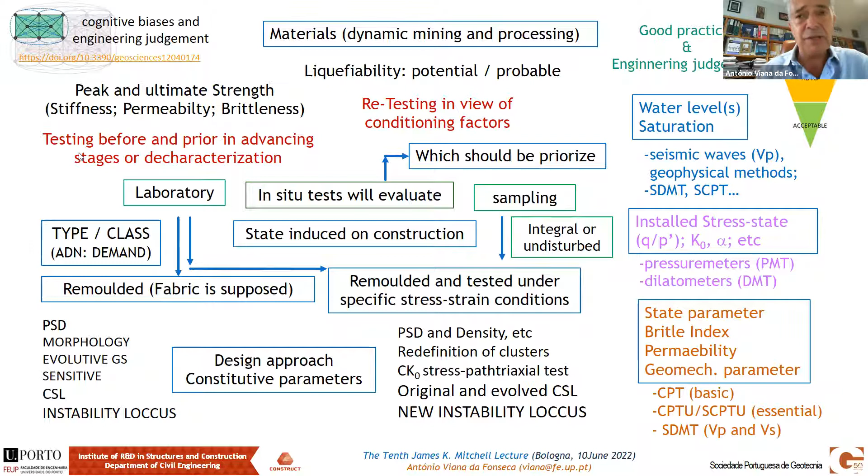This is like a schematic diagram of the complexity of these structures. The materials are dynamic—mining and processing—and they are necessarily variable during all the years these dams go up, in each phase, each height, with different quarries, or even within the same mine, variation exists. But that won't be the mainstream of the problem. The problem is all these materials after processing, and I will talk about iron mines. The core is iron, and we will discuss specifically one case where the percentage of iron is still very high—heavy silt and sand materials, always deposited during the years with spigoting from the crest into the upstream reservoir. This is a general overview that you can look at and criticize in due course. I will go on with our talk.

So why do we have these concerns? Because it is recurrent, unfortunately, that we have accidents in these complex structures due to several reasons, and I will immediately discuss them.

You can see here 1998 in Spain, Mount Polley, very, very recent, 2014. Then after 1 year, Fundão, the first big accident in Minas Gerais, a catastrophic disaster in terms of environmental impact.

We do remember that the satellites observed the incoming mud in the Atlantic Ocean after running for 200 kilometers or so. Then we had also a very well studied and detailed analysis in Cadia, New South Wales, Australia, 2018, very much analyzed and thoroughly analyzed by our colleague Mike Jefferies in his report, which is public.

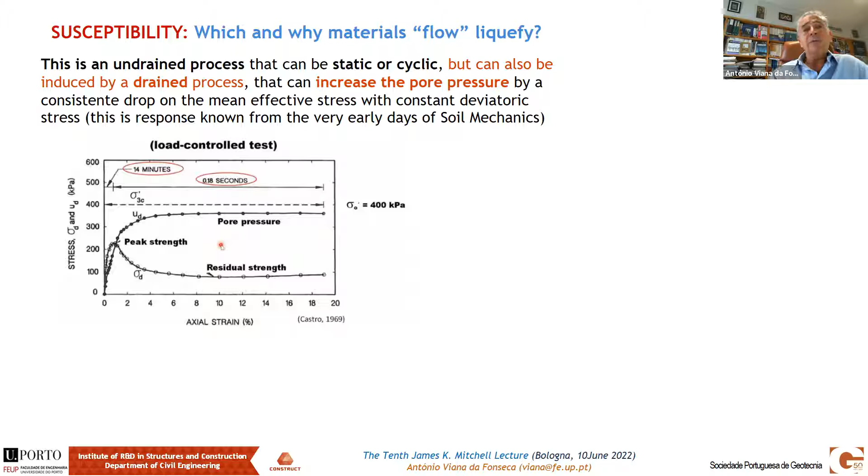It's a long way known subject, and you can see here some results from Castro working in the States with Terzaghi, Casagrande. And you can see here that these are the very, very classical results from his thesis.

But then I put here some schematic picture of how they stand, how they work when they are loaded by any stress path that I will discuss also. And by some reason, they get into a very peak, a very high strength and drop suddenly, even before getting into the frictional critical state approach.

I mean, the friction angle, which we know very well from the soil mechanics, the critical state soil mechanics approach. But this is strange. This can be considered to be strange, and it is unusual that these soils happen to go into a very stiff behavior and get a very fair and high peak strength, but then start immediately to soften deeply to a residual value.

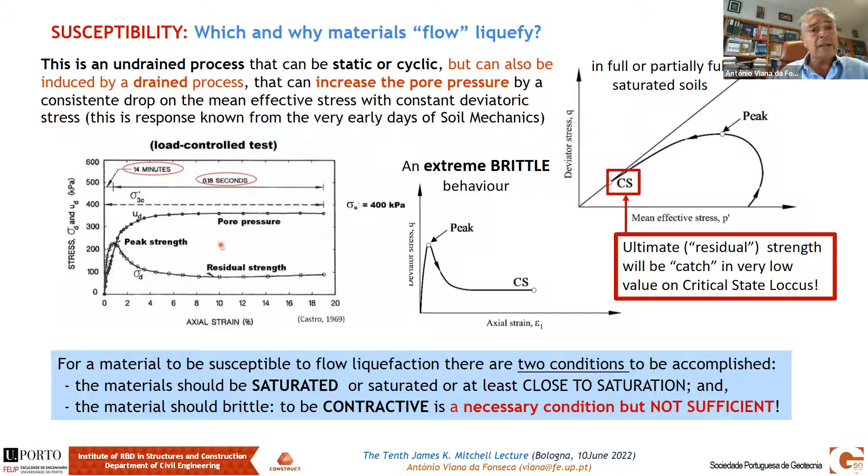So the key issue is that triaxial undrained compression tests can contribute to evaluate these strengths, these issues, the stiffness associated to a brittle condition.

So the materials seem to go with very low increase of pore pressure in the first phase of the loading, which is fast enough to be undrained, and then drop down. So maybe stiffness, high stiffness in relation to the strengths will be an issue, and it is an issue.

So we need now to state very clearly that we do not have in the common modeling approaches an easy treatment of this process, because this is not a conventional phase transformation locus, because there is no hardening after the incoming of the pore pressure increase.

And so we don't have the classical plasticity theories available here. So we have to have new flow rules. And there are some models already with this that I can discuss later on.

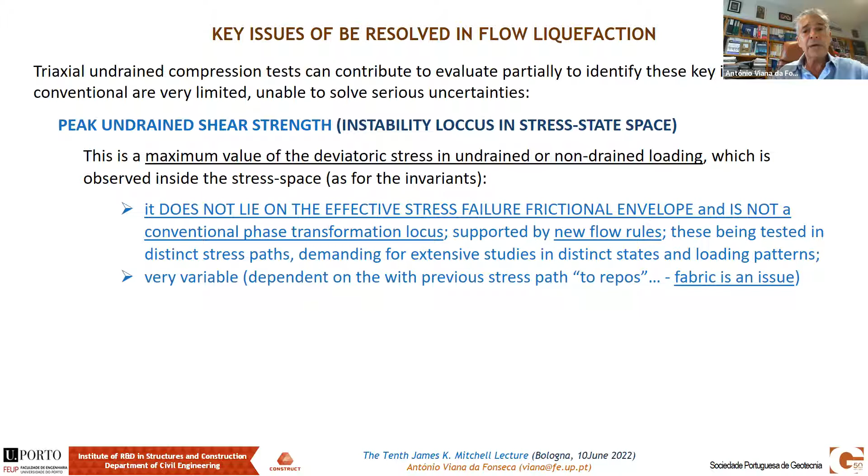This is very variable. It depends a lot on the interlocking between particles that happen to have high stiffness or high relative stiffness due to the strength. Fabric is an issue, so the fabric that is settled during the process of deposition of these materials is important. When we do these tests in the lab or interpret in situ tests, we have to keep that in mind.

So residual shear strength is quite complex if we don't have very thorough tests. Even in triaxial tests, or hollow cylinder tests, which are more complicated, or direct simple shear tests, I will not discuss this in detail, it's too much to cover, but I will focus on some aspects. We also need to study how to do this more easily, at least commonly, through in situ tests and new approaches.

I have already discussed the fundamental characteristics of residual or post-peak shear strength, which relate to the critical state line, and what is necessary to create this condition and induce failure of these huge structures. The susceptibility is there, but we have to have hazard, and the hazard, the triggering factors, are what matter.

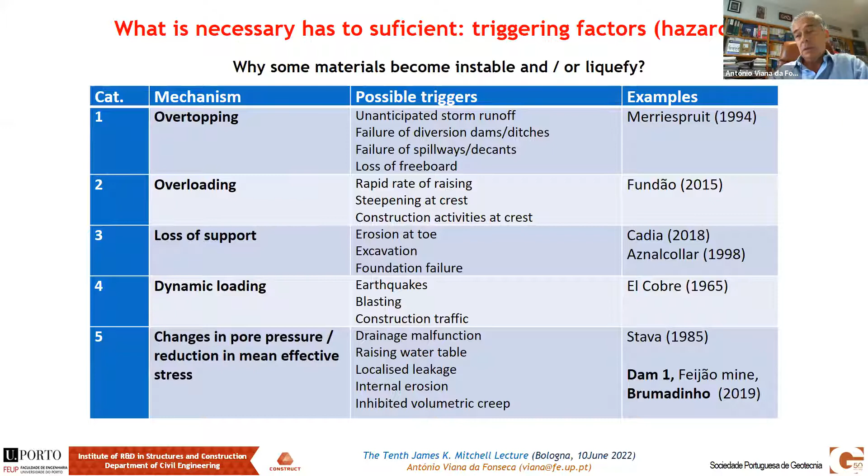El Cobre is a dynamic case, earthquake-induced pore pressure increase and then collapse. And finally, Stava seems to be a similar condition, in terms of the dam, to what we realized in the last panel of Brumadinho.

We will see. Here you can see some drawings and schemes of the typical stress paths that you could expect in such a triggering process. I will not detail that, but you can see here that drained unloading can also be a problem.

I mean, you are relieving the lateral stress or confinement stress, and things tend to come slowly into a specific point, which is the instability locus somewhere in the stress state space. Then at that moment, it starts to fall down rapidly, so in an undrained condition, towards residual.

And that's a fact, we can do that in the lab and try to reproduce it in these structures. The undrained shearing is the classical case: you put overload very rapidly during deposition of these tailings, and for some reason there is no draining system competent enough to alleviate this natural increase of pore pressure, which accumulates, could be going towards the critical state line, but then reaches a condition that drops again down to very low residual values.

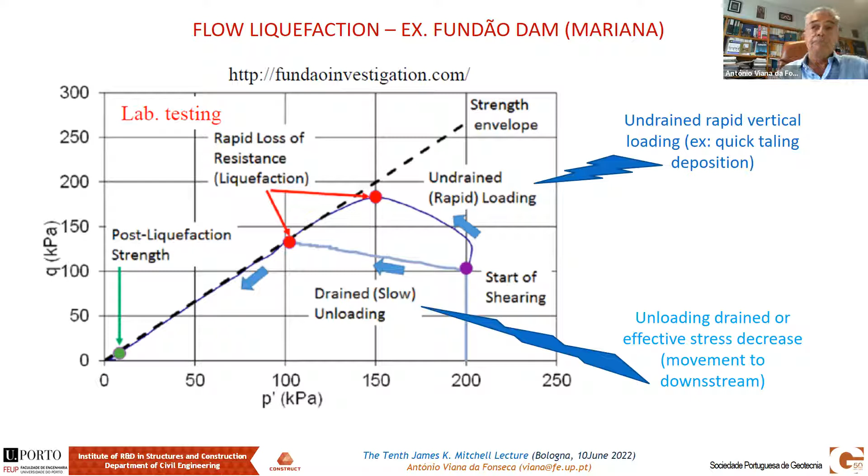Anyway, so Dam 1 in Brumadinho. Brumadinho is the village that was mostly affected by this collapse. The mine is called Córrego do Feijão, meaning the small river of bean. That's the name, very simple, so it's the small river, little river of the bean, Feijão.

Because there are several rivers in these valleys, water is always very high in the reservoir. And the draining systems have to be very thoroughly implemented.

Well, this is a scheme of the dam, and I will show you in a moment how fast this happened, as a lot of people know and others may not. So on 25 January 2019, in 20 seconds...

The dam collapsed. I could show you a movie, you can go to the internet, there are a lot of illustrations of that, because there were cameras filming at the moment, observation, instrumentation, and it is terrible.

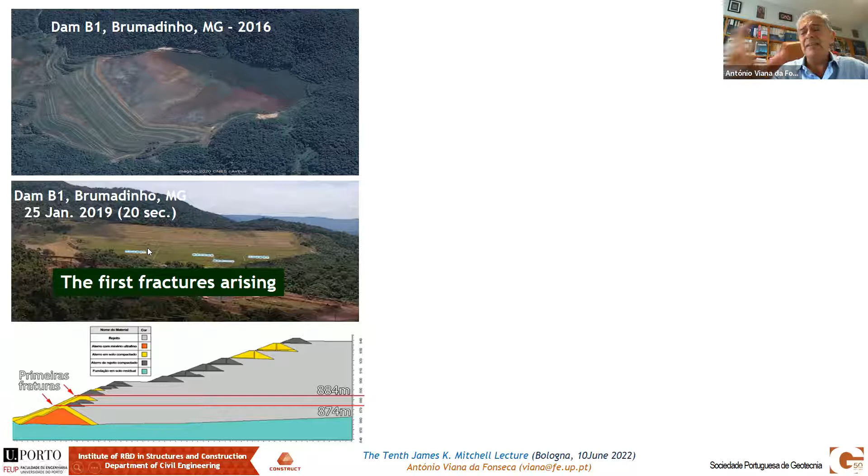But look, the fractures started somewhere here when they are analyzed in detail. And then you can see that at 12, 18, 23 seconds, something was already moving here, and cracks are starting here.

Well, 10 seconds after, and there are lots of images during the process, the dam was out. The wall is here still standing, but the rest, this is clearly the sign of the surface, quite vertical, and eventually planar.

And you can see the huge amount of mud going, unfortunately, to the headquarters and part of the infrastructures of Vale, and also running to the population and the village. So it's terrible. It's seconds.

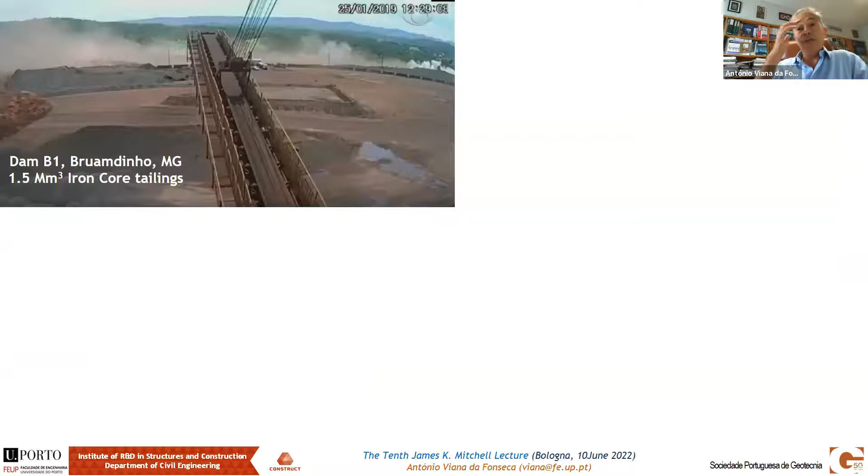And there is no real sign that was thoroughly analyzed, whether from the piezometers or even the observations, the radar — there are papers on these satellite measurements, etc. I mean, it's really too fast, even for common or even some upgraded recent instrumentation to detect.

So we have to be very careful when designing and analyzing these conditions.

So you can see here in the top of the reservoir. This is the crest somewhere here. You can see the valley there, and this is the top of the reservoir, which is something like 1.5 million cubic meters of iron ore tailings, very heavy.

You can have unit volume like 30 something kilonewtons per cubic meter, and specific gravity around 5 something.

Anyway, so you can see the damage, you can see the disaster, the catastrophe, and in the end, the post-mortem analysis area.

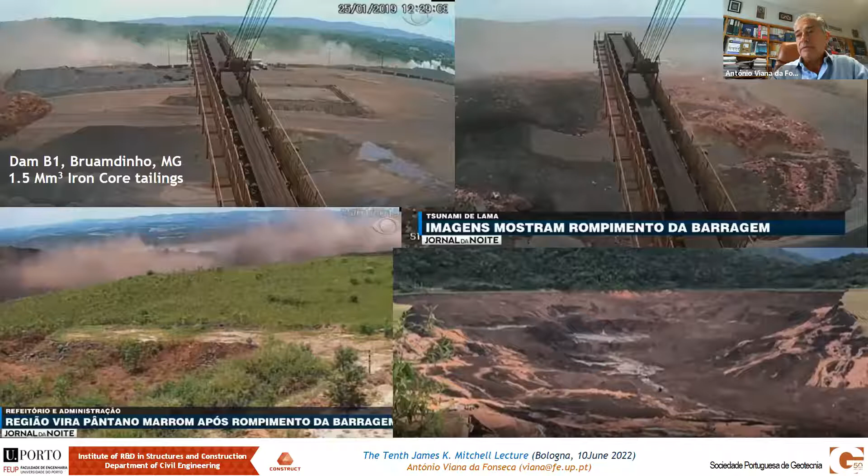So we have susceptibility, we do. We have hazard, we may have. We can see that we have to go after this, and we did.

We had panels that worked on this analysis, very, very competent panels, most notably and in more detail two, one led by Professor Peter Robertson, whom I consider a good friend, and they did a very good work with the elements they had at the time.

In the end, with a very thorough analysis of the in situ data and the lab tests they could have, and all the lab tests they could do with sampling that was limited by the conditions, they reached some conclusions that could be valid.

But afterwards we were challenged to do a reassessment of these conditions with more data, and mainly, as I will tell you, with a lot more lab tests, with samples collected really inside the mass that had collapsed. I will explain in a moment.

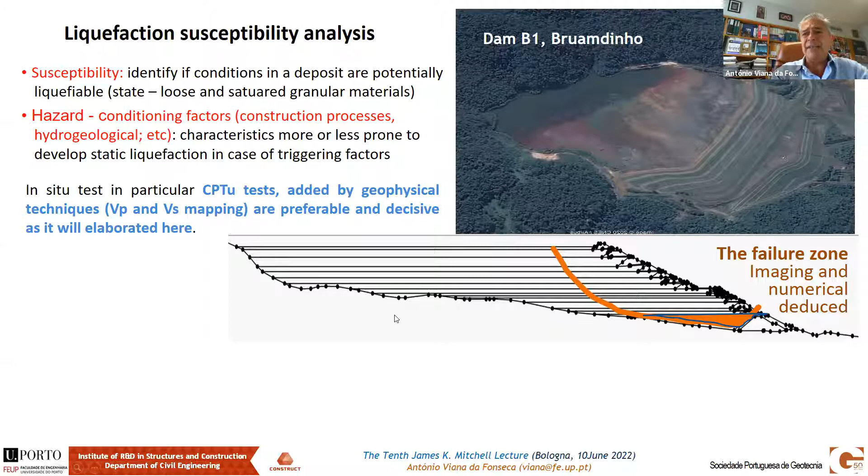And then after all the numerical analysis that were developed in Barcelona, at UPC, the Polytechnical University of Catalonia, with colleagues Antonio Gens and Marcos Arroyo, whom I have to acknowledge for working together with me on this analysis. And in Porto, we did a lot of characterization that I will show you in a moment.

The thing is, this is obviously already a back analysis of the old data that could be recovered from the previous in situ tests and some sampling, not undisturbed, but which could help in defining all these sections.

This is one of the sections, the one we realized afterwards was intercepting the point or area where the increase in pore pressure was generated. And you can see here the shape, which fits well with the imaging-deduced and numerical analysis.

But then I had one point to discuss and show you. There was a lot of concern about this and other dams before the failure, mostly because after the Fundão failure, there was very strict regulation about the conditions of these dams. And Vale and its consultants were looking into the stability conditions of B1.

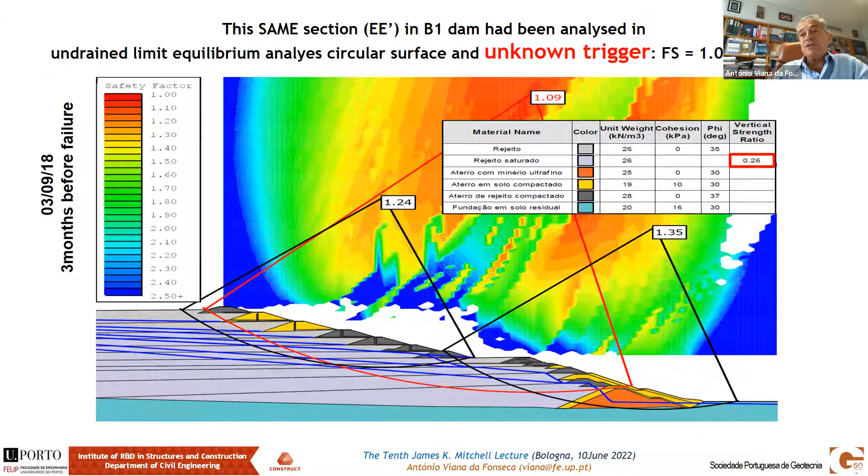You can see here some of the results of the latest analysis, developed between common limit equilibrium analysis with classical circular failure surfaces, and getting the data from the tests that were available. With no more comments than the imaging and the values expressed in these public reports, we could have a factor of safety of 1.09 in the red surface using the Spencer method.

I put here the numerical analysis that were done, a lot of numerical analysis during this month of analysis in CMINI plus FLAC. It's not really very far from circular, in fact it's wider here, mostly planar, not circular, but anyway the problem was there. Eventually a limit equilibrium analysis, if taken with other inputs, could be and should be a very good sign that the dam was at the limit, even in a deterministic approach.

I want to share, because it's important for the discussion, that the laboratory tests and in situ tests interpreted until that moment were a little tricky, because there were vane tests in these materials, typically silty sand materials, which are not reliable since you can have partial draining conditions. The values you can see here, which I will not detail, are typically much higher than the ones from the reinterpretation of the CPT and CPT-U tests made prior to the failure.

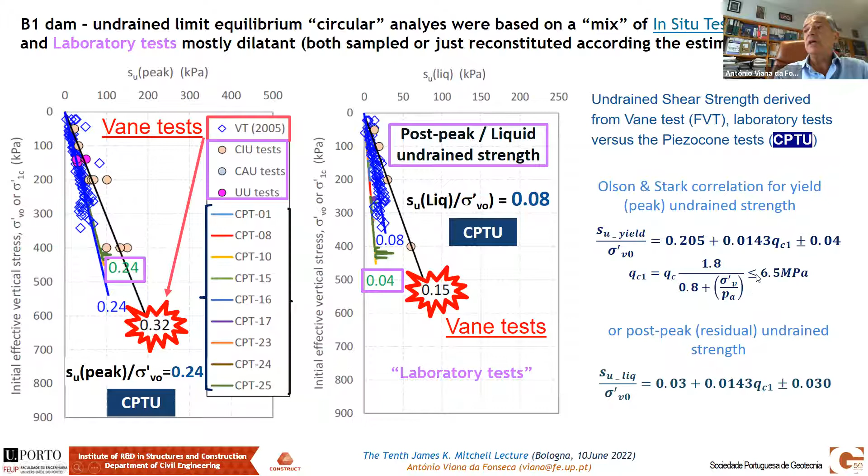Just here, Olson and Stark correlation, you can see how different the values come to be in a specific analysis of the CPT-U tests.

Critical state soil mechanics is a fundamental approach to get the peak and post-peak residual or liquefied resistance values. There is some confusion in concepts, like post-peak sensitivity in clays is not the same, because these are full liquefaction in non-plastic granular soils, which can be due to cyclic actions, while in monotonic process stress paths you may have different backgrounds on these behaviors. In this case there is a steady rise of the pore pressure ratio, and complete loss of contact between particles can happen when dealing with earthquakes, with vibrations.

In that condition full liquefaction can happen because the particles will not stand together, while in a monotonic process, in a flow process, the particles are provisionally, temporarily in a mud condition, but then tend to grab together again at a very low level on the critical state line, still getting into frictional behavior, but then effective stress is very low.

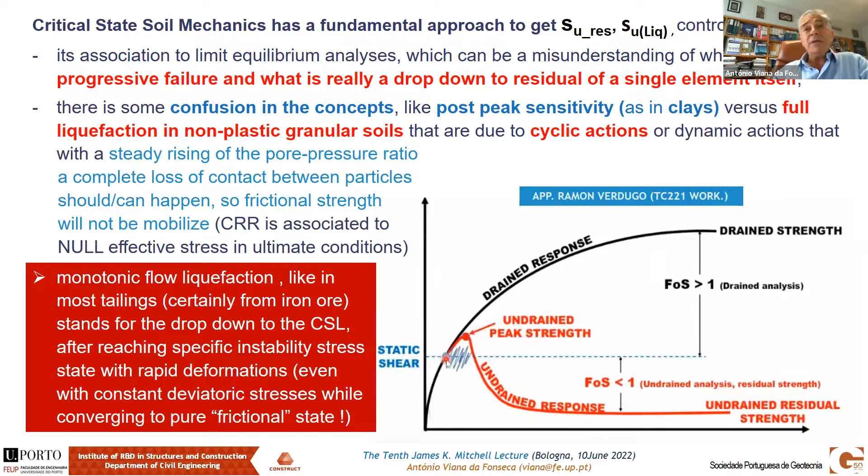With this in mind, described here in this red box, we have to do specific analysis. Fortunately, in effective stress state, meaning finite element codes, finite difference codes like FLAC etc., these have to be done ideally in effective stress state, fully coupled analysis, if the models we integrate are competent to do that. There are models already very much competent, not completely - I will discuss anisotropy at the end of this presentation - but this is available, and we should, and are going more and more in this direction, fortunately.

We can also rely on limit equilibrium analysis if we have a good interpretation of the limit values, in the end the very low limit values to be considered. This is described here - this has been done already in Fundão using NorSand from Been and Jefferies, the model. Even in Fundão, Professor Morgenstern and colleagues did the same in FLAC, both in FLAC.

Professor Peter Robertson in the B1 did the same with NorSand. Unfortunately, NorSand could not be taken towards the end, so they had to use a simpler model, which was a pity. And finally, in recent days, Cadia also, Jefferies in 2019, after the failure in 2018, applied NorSand with no problem.

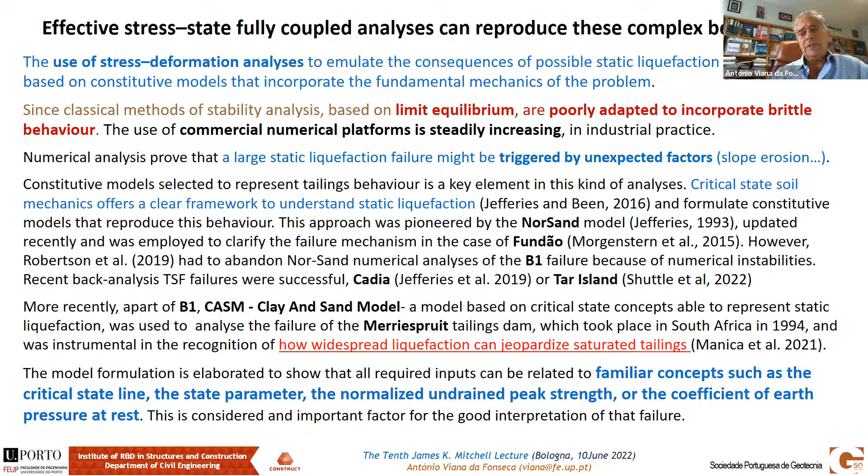They did the reinterpretation of this B1 by using the CASM, critical state model for sands and clays, soil mechanics. I will not describe the model, but anyway, it is already emulating very well the process, although with a few limitations that we will discuss.

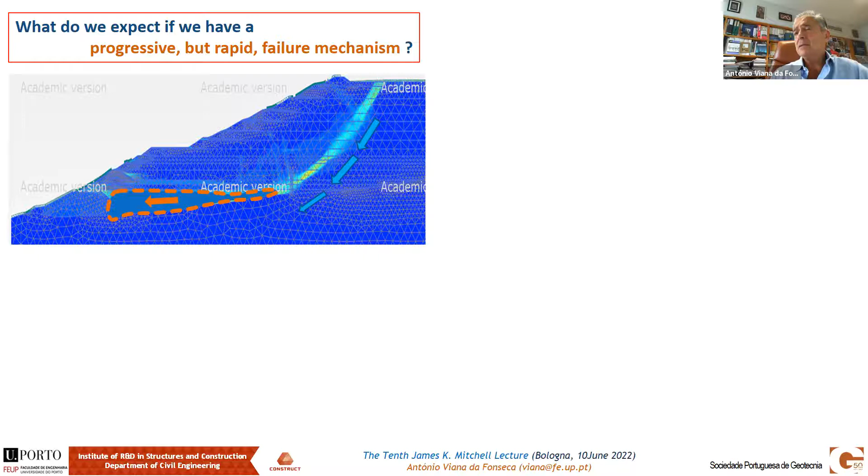So what do we expect if we have a progressive failure? Rapid failure? Well, we do need to look for the tests that we could do in representative samples in the lab. I just put here in advance some of the tests that we did.

Look at this. This is another material, not the material in Brumadinho, but similar, very similar. You can see here, just to start, that if we do a K0, an anisotropically consolidated test in undrained conditions, if you go in compression, I will show in a minute. But if you go in extension, we have very, very low values mobilized of undrained shear strength.

I will come back to this because it is important to realize that in these kinds of failures, as in slopes or whatever you can imagine, or even foundations, you may have the need to look for anisotropy, the induced and the inherent - of course if there is inherent anisotropy - and induced anisotropy if you have extension tests like lateral compression conditions. And this is very, very critical.

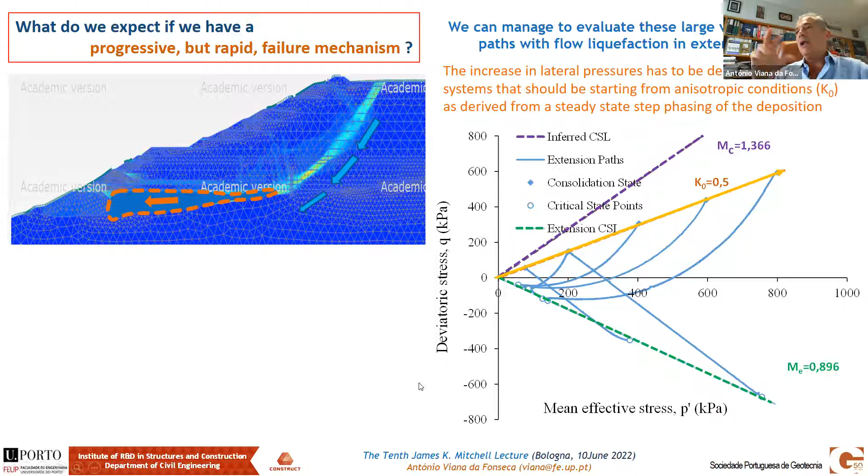You can see that the drained tests were confirming mostly the same friction angle, no inherent anisotropy, but then you have the induced anisotropy, which is very, very high. So it's like an alert, an alarm. It means we have to be aware that the stress paths are not exclusively in compression.

So if you go into numerical analysis, you can cope with this, but only if the model is able to reproduce these conditions - we will see in a moment. And we are looking for the implementation of these anisotropic models in order to reproduce these conditions.

Do we need undisturbed samples? We should, but at that time there were no undisturbed samples in the huge amount of data available in the lab, as I told you before. There was no gel push sampler, which is in fact a very excellent sampling technique developed by Kiso-Jiban company in Japan, which we happened to work with in a very recent European project, Liquefact, together with Trevi, with the intersection of Professor Michele Jamiolkowski, and in collaboration with Technoin, Trevi, and finally associated with the University of Napoli, Federico II. So we have some experience.

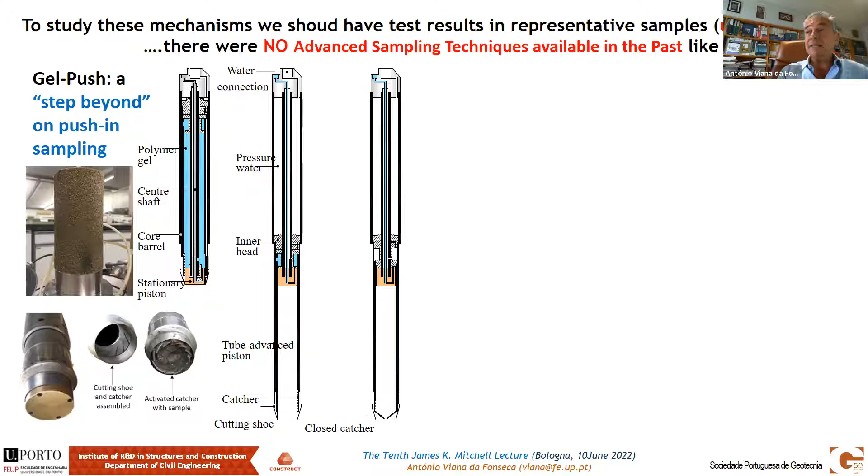It's really a very nice equipment, and we did very, very good sampling in sands and silty sands, alluvial, close to Lisbon, as the Italians did in the north of Italy, because they were studying the consequences of the liquefaction of Emilia-Romagna in 2012.

But we have alternatives, and Vale, for instance, is now working a lot on implementing these systems as a possibility to have good samples to get into the lab, to preserve at least most of the fabric inherent to these materials, and to do more representative tests when they want to look at the behavior in triaxials or whatever. Dames and Moore is a very good alternative, as we also realized from the studies we did in the Liquefact project, the European project financed by the Commission.

Anyway, but if you don't have that, what can we do? We know that most of us working in this area can, at least for the critical states - but more than that, if we try to reproduce the in situ conditions of a very loose deposition, we can start with the materials in a very loose condition by using the technique of moist tamping. I will not describe it; it is well described in different papers, and I just name one here, and you can see the illustration of the process.

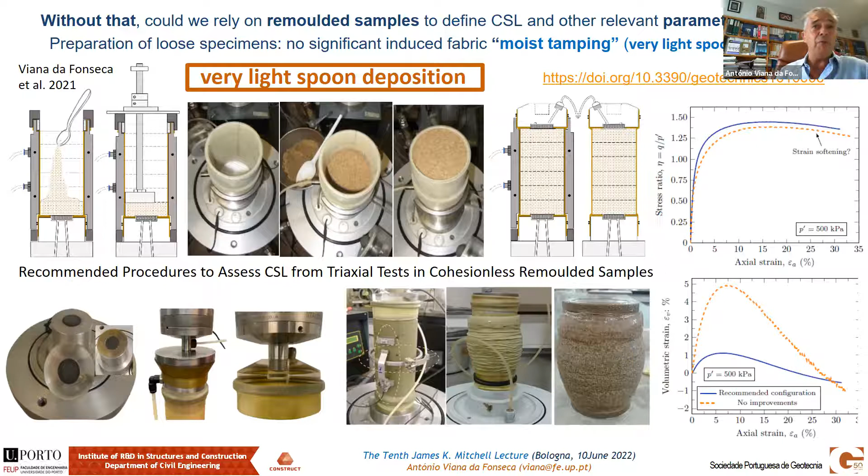We were very confident with the results. Not perfect—we have no undisturbed samples, but we have some.

This is just some of the results that I will show in a moment, and mostly the point I want to introduce here. We had some small block samples that we compared, and you can see comparisons between critical states in undisturbed and remolded conditions, and they fit together.

Even in this very sensitive representation with void ratio against mean effective stress for the critical state, the lines you see there—black, brown, and red—are the ones obtained by the remolded conditions. The other points are undisturbed samples, which are always very anisotropic.

Still, the main matrix, when standing in the more blackish areas that I'll show you, or brownish or red, represents different percentages of iron due to the timing of the process in the mine, and also due to the injection process. Fines far away, less fines, coarser, blackish because they have more iron.

This is detailed in the report, and it will be in papers soon. We are quite confident that we could work with these critical state lines.

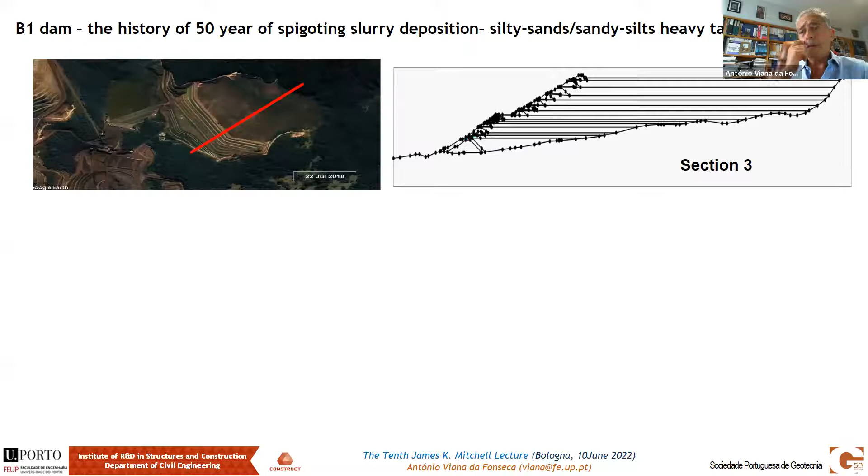This is described a little bit in a paper we published some months ago. So the dam is here. The dam failed like that. No details needed.

The system response considerations of B1 were very much detailed, with a lot of work on the in situ data. This system response was based mostly on tests done before.

We also looked at 3 experimental sites where we grabbed these new materials, new in terms of characterization, well allocated inside the reservoir. We managed to get them, by a topographic approach, somewhere inside the failure area, around the failure area, and in the bottom of the failure line, I would say band.

Wow, how can you do that? And then we got some material here too, which we wanted to test because it's clearly finer with some slimes around. How can you do that? It had already failed. Indeed it was.

You can see here from the CPTU, the in situ tests—there were some good CPTU tests, mostly one year before and two years before, they were worried about that. We managed to look at where we could get this material, where we could get that material.

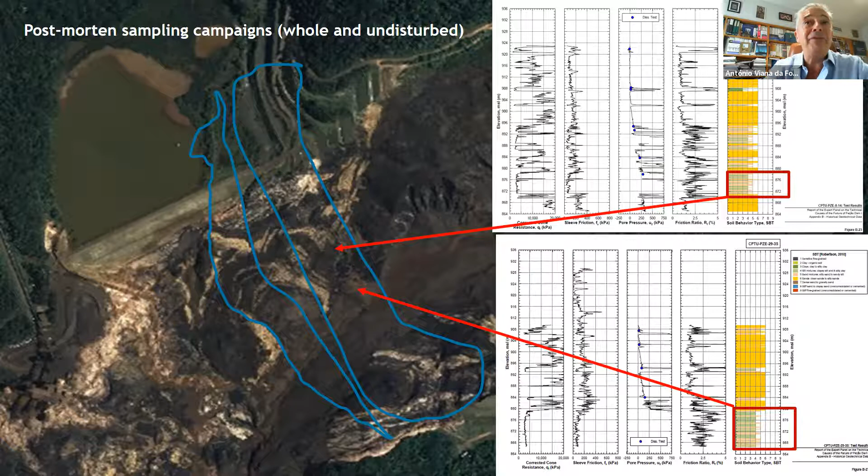We were there before Christmas 2019, and we decided to—what, get into the mud? No, we had the luck to realize, which I didn't know before because I had the images, that there was huge... I mean, I'm always saying this because everything is very big.

Blocks, massive blocks that after the collapse and the running of the flow, some of the masses, integer, preserved masses, stood in the borders. You can see here the draw of the dam. The dam is still here, more or less like that in the crest, and this is the lower part. So we looked at blocks that over time, during 1 year, slid down, but the mass was preserved. This was very interesting for us.

So we had to go there to get the materials, digging small ditches enough to go into the interior, undisturbed materials, and to recoil some block samples. We didn't have too much time, but we also collected remolded materials from the interior. We carved out big bags of materials that were transported to Porto, where we did the lab tests.

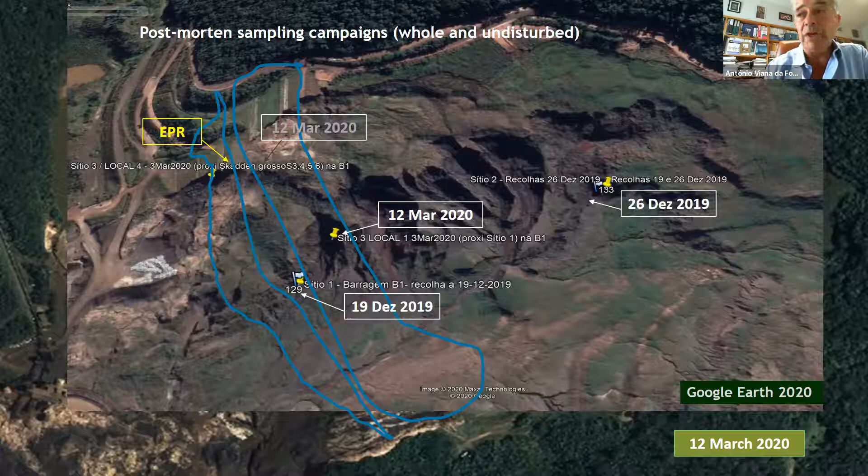This allowed us to do more in-depth analysis of the materials, which unfortunately was not done in the first panel from the group of experts led by Professor Peter Robertson. They could not get these materials when they went there because the site was still very unstable, full of instability, and still very wet, at a moment it was really impossible to go down. We had the luck to go.

You can see here some images that are in that paper in the Soils and Rocks journal, showing the works we did there. There were 3 sites: site 1, site 2, and site 3. Site 2 is somewhere here, look at the mouse, long away, because it's a zone where we have more fines and slimes. These were the basis of our studies.

You can see the blocks that were recoiled, illustrated here, and we are working sampling the undisturbed conditions. This was really a tough process. But the big bags were the ones that assembled the materials as a whole. And we did identify very distinct materials.

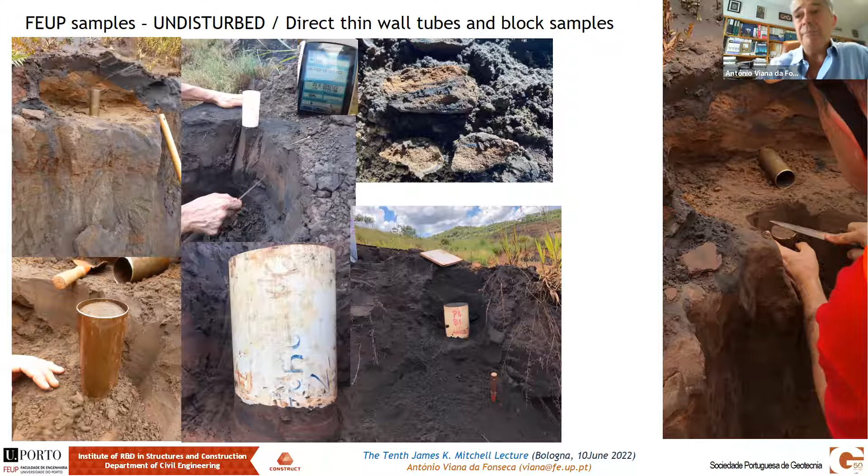The blackish, large zones of these blocks were really blackish with a very high percentage of iron, like 80% or a little less, a huge amount of iron, from times when the process was not so efficient. There were also more brownish, more processed, finer and lighter materials. And when you get into the very fine materials, you get the reddish ones, very much oxidized, older ones, on the bottom of the dam. So we recognized 3 kinds of clusters of materials.

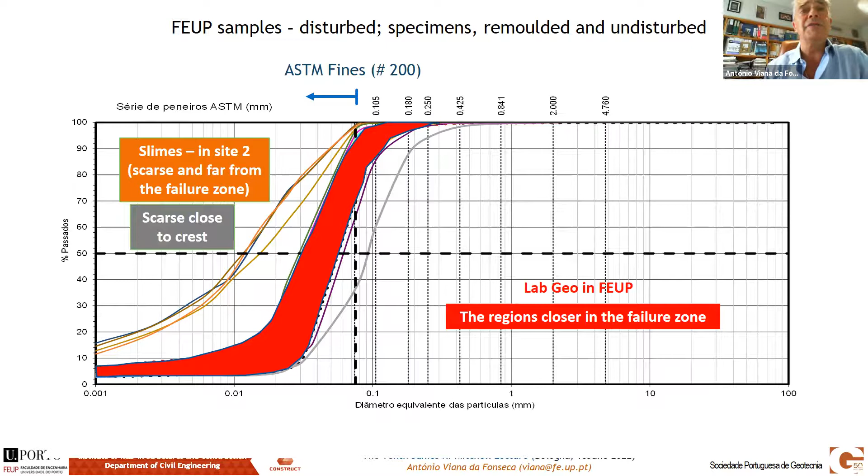We have them here inside the whole set of samples available at that time from previous analysis. This is the region closer to the failure zone after analysis of this old data. When we got to these sites, we defined all the materials we had — this is only the average of each kind of cluster, black, red, and brownish — from every bag, every sample, every undisturbed sample was analyzed for particle size distribution and Atterberg limits.

There was no plasticity in any of them, only in the slimes. You can see here the difference in GS, specific gravity of the grains — like 5, like 4.5, and like 3.85, completely different. The grain size distribution seems very close; indeed it is, although in the sands and silts there are some differences between the very fine and less fine materials, but mostly the difference comes from the GS. We also did microscopy analysis, SEM etc., and they are really very different.

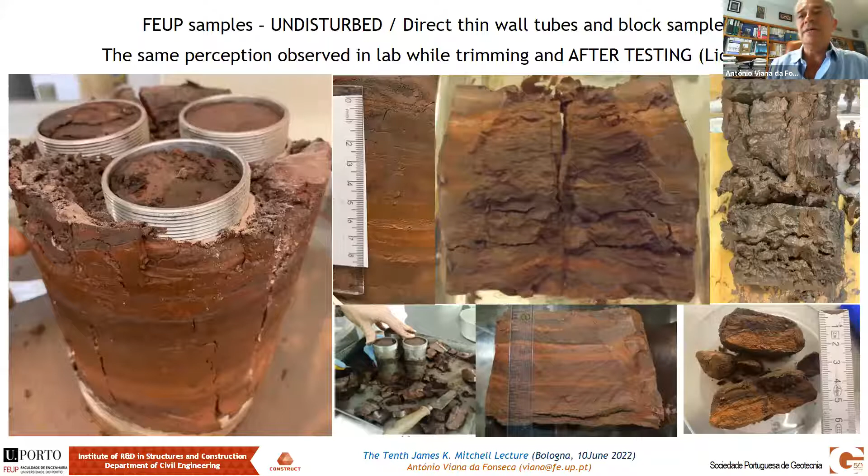So, 3 clusters for our analysis, for the numerical approaches. You can see here some of these undisturbed samples. The result of that, which is really very nice, is already being assembled into the triaxial cells where it's possible, mostly with Bender elements, to evaluate the VS value, which is very important to define the stiffness of these materials.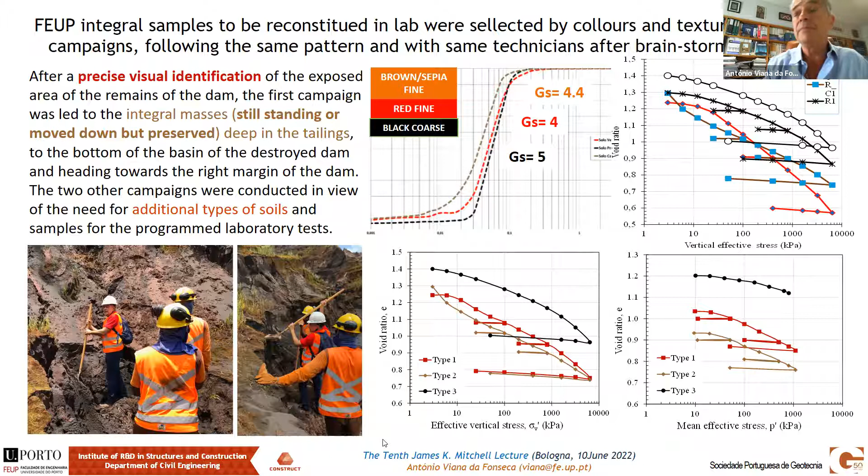And well, between the red and the brown, there is a small difference, which was revealed in compressibility, in oedometer tests, and isotropic consolidations, but also in the critical state lines, which is not the only issue we should be concerned about. We are going towards the main concern, which is the undrained behavior, in a moment.

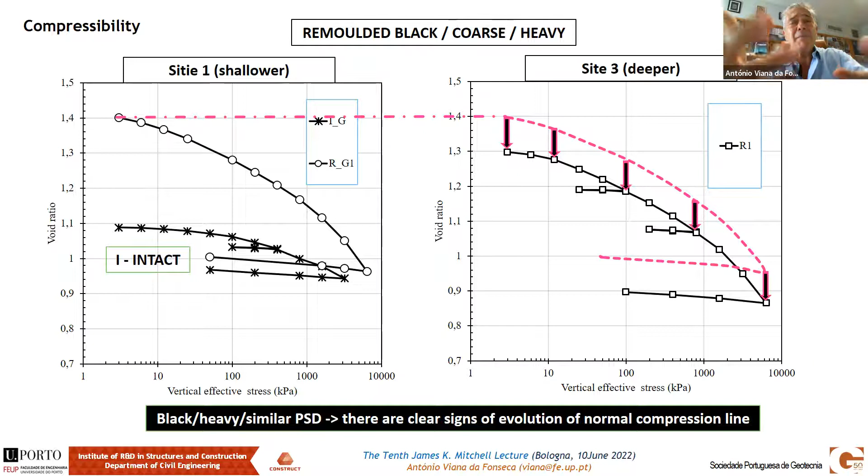So we have that. And just for you to have an idea, if you go from a shallower to a deeper site in the same material, because the deposition was non-linear from the margins to the center, the deeper material in the blocks is a little bit denser when compared with the same kind of material upper, which means that it has evolved.

Well, of course, it had a lot of pressure on it, and it will have consequences even in the particle morphology, which will have consequences in the critical state lines.

Then we have all these deformability moduli in virgin or unload-reload, which is necessary for the model. Just for curiosity, the critical state lines are detailed in the report and also in that paper.

You can see here that we always have a first phase of virgin tests with virgin materials reconstituted there, and we get some trend in the critical state line. Afterwards, after doing all the analysis always with virgin soil, we had material already with higher stress. We put them apart, even the dilatant conditions, we put them apart after testing, and then we started doing the analysis again with these materials, and we realized that the critical state line dropped down.

Something was happening at the particle level that could explain that, and that's in fact what we did - we are still waiting for new analysis. The SEM allowed us to see that the particles that were rougher at the start of the test tend to evolve to smoother, losing their roughness. That was a key factor for what happened after stress - the material could have a drop down of the critical state line.

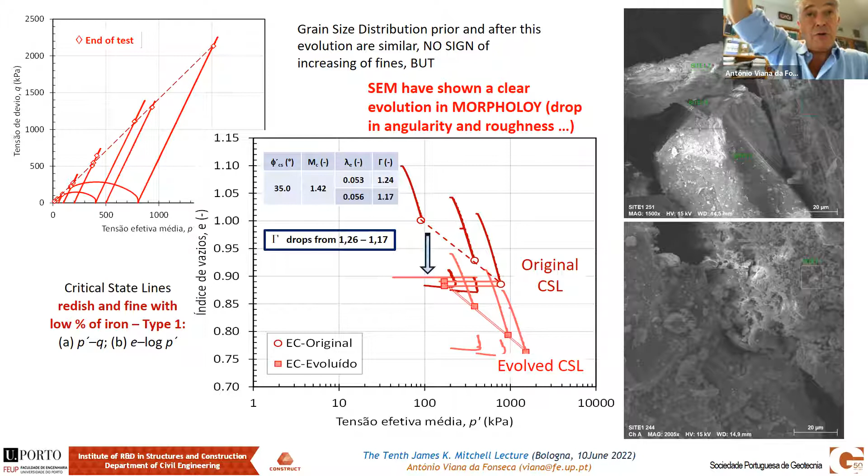So this is also an alert - you should be aware of that when doing analysis on the same materials coming from the shallower zones to the deeper zones. And this was incredibly reproduced in all 3 clusters of materials: the red, the brown, and the black material. All of them showed this evolved condition after being stressed up to higher confinement effective stress.

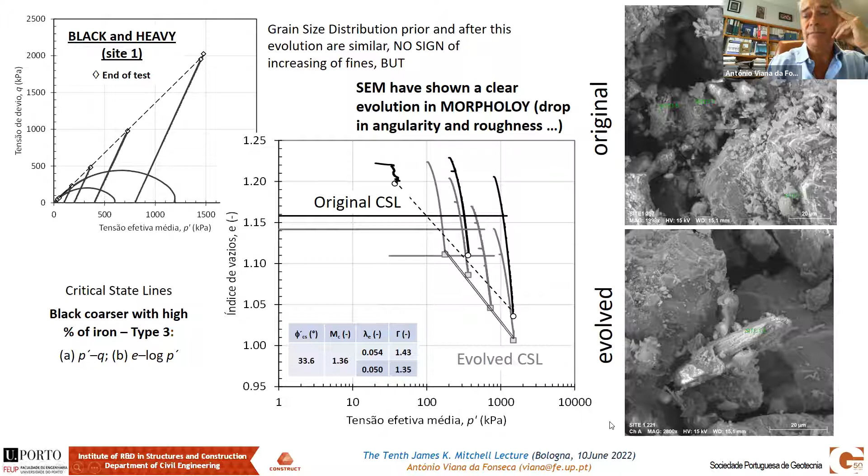So these are lab tests - results that were very important to define the critical state and dilatancy parameters that were then explored in numerical analysis. Just a small remark on the morphology, I will not spend too much time.

This is also available in the PowerPoint and here, and you can see it in the written part. But this is just a quick recap of the analysis we can do in morphology to look for the quantitative indexes that can help us define the quality of the material and expect different compressibility and critical state lines, which in fact is associated with compressibility, as we know.

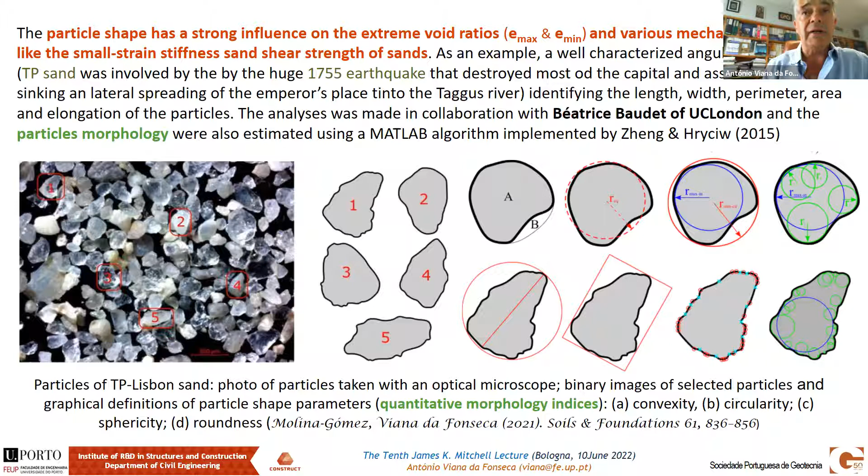Convexity, circularity, sphericity, roundness, and roughness is a subject that is now well dealt with. We have to be aware of that. We have been doing this in sands, and other people have been doing this comparing different materials, in terms of these different indexes.

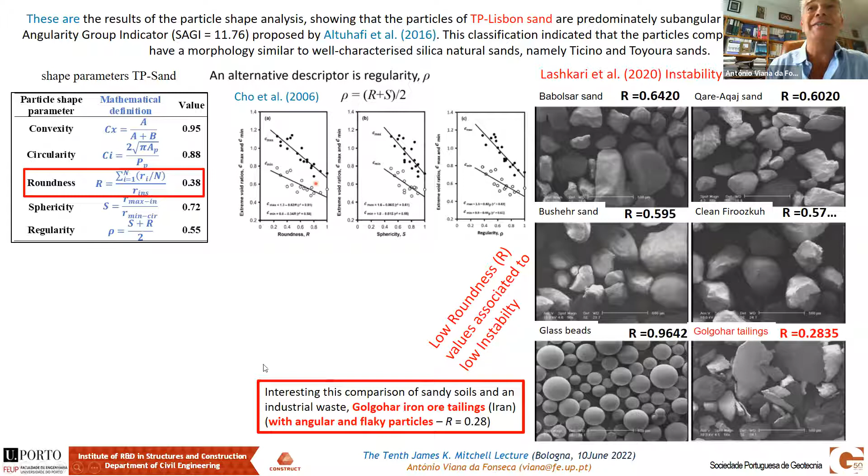This can reveal, as in this case, in this very nice Acta Geotechnica work from colleagues in Iran, they compare sands with mostly similar indexes except roundness, and the Golgohar iron ore tailing has a lower value of roundness, which has consequences for the critical state line.

Even Barry Lehane and his colleagues at UWA, when they looked at cone resistance comparing sands and tailings, also realized that you can have completely different cone resistance due to this kind of roughness and roundness.

This work from colleagues from Iran is really interesting because they analyze this brittleness index, which I will introduce in a moment, and they try to associate it with the undrained shear strength ratio in terms of effective vertical stress. They realized that these Golgohar tailings happen to have a very high strength ratio, having this IB quite incipient, while other materials they were studying, like clean Firoozkuh sand, were much more affected by this brittleness. The consequence was that the strength ratio, undrained strength ratio in peak, initial - they call it initial, the maximum one - and in residual, which they call liquefied, are highly sensitive to this brittleness.

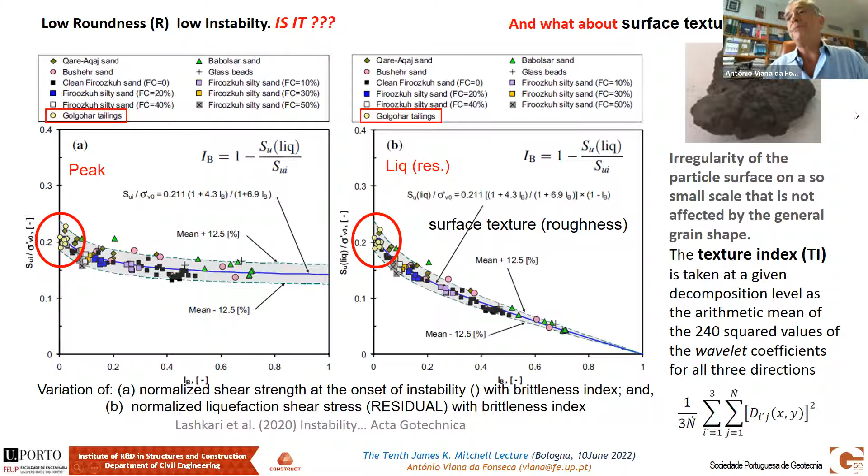We had to look for what kind of consolidation we have in the lab in order to reproduce the conditions when you stress that in undrained paths, or even in flowing pore pressure, increasing pore pressure, or other tests like extension tests, etc. Should we do that by isotropic consolidation of these samples, remolded or intact?

We studied that, and finally we realized that in terms of instability, at least in these materials, it seems that there is mostly a unique instability line, which is not always the case, but in this case of these iron soils, it seems not to be very much different, although the stress path is completely different.

So if you look at limit equilibrium analysis, you may have a problem, because if you start from K naught equal to 0.5 or 0.7 or 1, the stress path evolves very differently. I mean, you are plastifying more or less the material in the stress path depending on whether it gets longer or shorter.

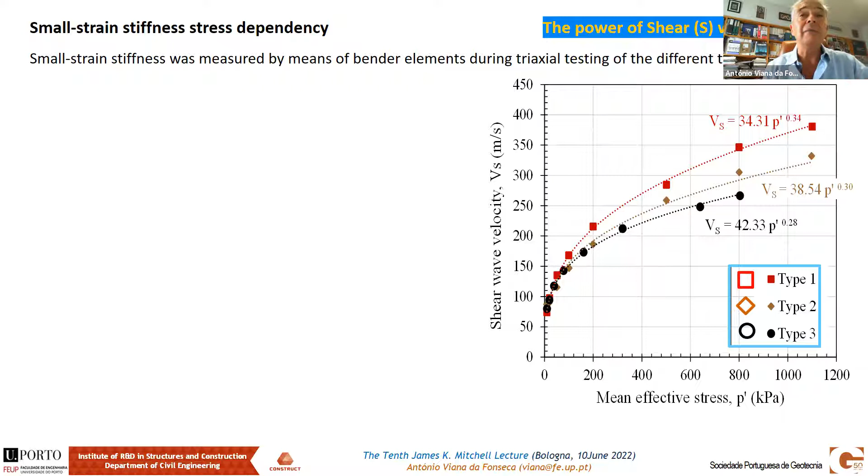Well, we had to look at the fabric, and we had to look at the variation of this VS - VS is the velocity, shear wave velocity. This is very important for us to look at whether these materials are cemented, hypothetically, or if they are interlocked with a very strong fabric, or if they don't have such structure, or it's incipient - the fabric - and they behave like recent materials.

So VS is very clear on that. We looked at that and realized that all these tests are consolidation effective, isotropic consolidation step by step, and at each step after consolidation, after stabilization, which is rapid but we still wait, then we do all the tests we want at each increase of the confinement effective stress. And the VS values have this trend here.

I will not discuss the numbers, but these numbers have already been clearly analyzed by several authors - Carlos Santamarina did that a long time ago. You can see that materials with very high beta exponents and low alpha - alpha being the constant, beta being the exponent affecting the stress state, confinement effective stress - these materials are typically ones with no cementation, no real evidence of cementation at all, and the fabric is also quite smooth.

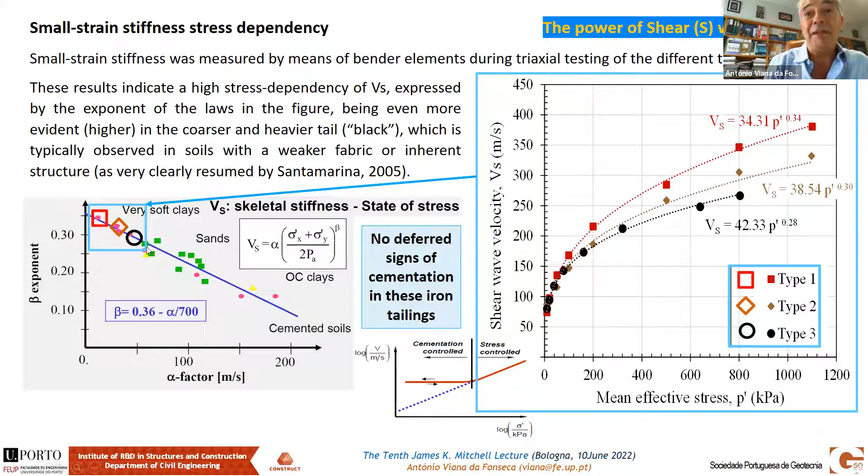Indeed, you see the A value is higher, the N value is smaller. There is fabric, but there is no cementation, because really there are still values that stand close to the area that were previously shown, that was somewhere here, somewhere here. Fabric, maybe. Cementation, not so much, or null.

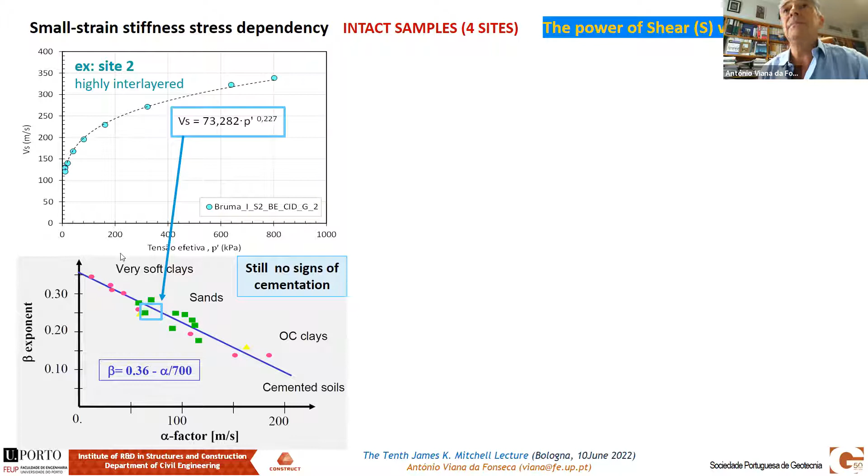Anyway, so again, the plotting of these tests. This is another test on undisturbed samples. And you can see here that we do not have so much of that in the lab, even in block samples. But if you go to the in situ tests, and I may say that I'm a fan of in situ tests, my work in the long-standing career and in the committee is mostly also lab and in situ tests.

And if you do analyze the seismic dilatometer tests that were performed prior to the failure, very precious data. In fact, they did not do the dilatometer tests. The purpose of doing these tests was only to have the shear wave velocity in depth, because the modulus that our good friend Diego Marchetti, son of the late Professor Silvano, who was a very good friend, do remind him with a lot of care. And well, Diego did a very good work recently, and the modulus of dynamic is very good.

So they did that. For some reason, someone called for that, and we had a lot of SDMT values, G naught, so VS, and then G naught in depth. And they are all plotted here, all these blue things that you can see here in depth with P prime, or here by this plotting.

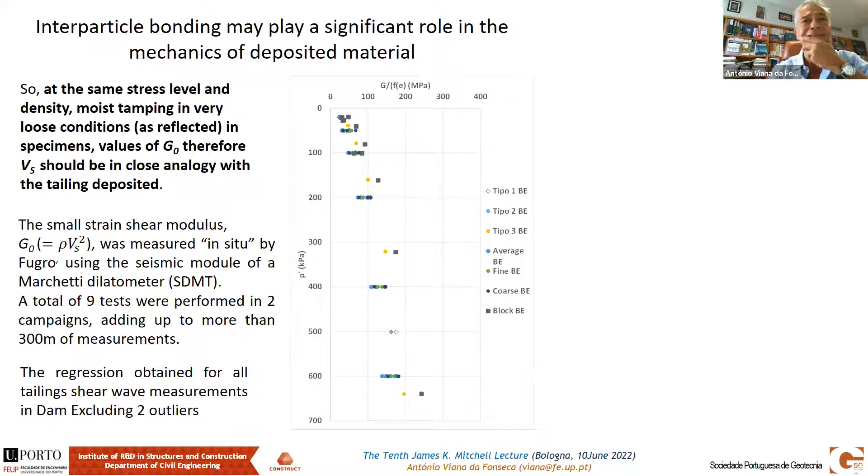And you can see here the plotting of all our data from the block samples with the VS coming from the SDMT, and this is quite confident. We are now very, very much happy that we can proceed, and we did.

So again, some details on the interpretation of the non-cementation of this. And I will go on because this is in the panel, is the work that was very intense from Marcos. Marcos did a lot in this analysis together with us, we had two teams working together, you know. This side here more experimental, there more numerical, but even in the Plaxis we did some things together.

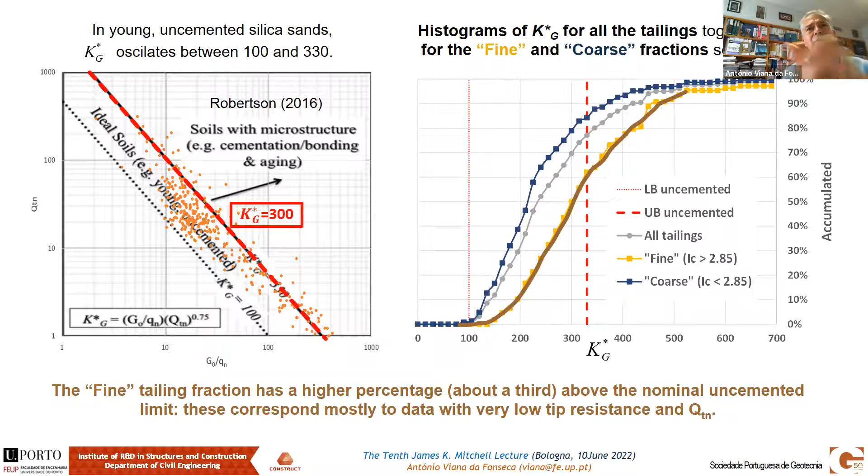So shear wave velocities and P wave velocities are very good for what? Well, we saw at the moment, at least, that we can have all this information about the reality of the soil as cementation or whatever, but also because we need the G naught. I will tell you why, because it's part of the brittleness, is part of the index that is decisive in the behavior of the materials, being more unstable or less unstable.

But also, if you can have the P waves in the lab to check for, if you are saturating well your materials, there is a lot to do to convince people that, look, if you have Bender elements, look at the P waves, and in the P waves, you will have definitely the confidence that you are in full saturation conditions, because it is tricky to go with the B from Skempton.

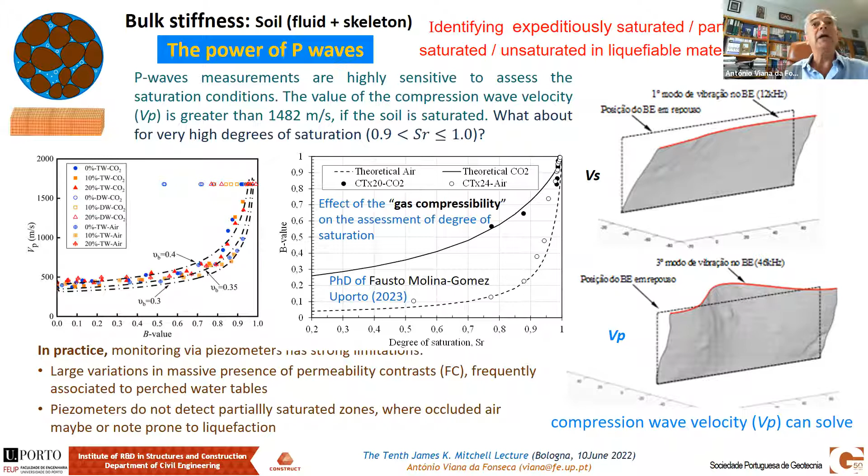Because while B from Skempton, if you don't have P waves, then you have to be very, very, very strict, only 0.98 or 0.99, and that's it. That's our experience when we compare with P waves. By the way, P waves are very important in the field in order to know if your water that is being detected by boreholes or even in CPTU is at full saturation, let's say, water level, or it is a perched water level that can be, well, giving pore pressures, but still with bubbles inside, so partial saturation.

Not unsaturated, but partially saturated.

I would be faster in this part of the lecture, because this is the data that we had from intermediate, coarse and fine materials, but then we have to zone this. The colleagues in UPC, CIMNE, had to do a zonation of the zone in terms of the finite element codes.

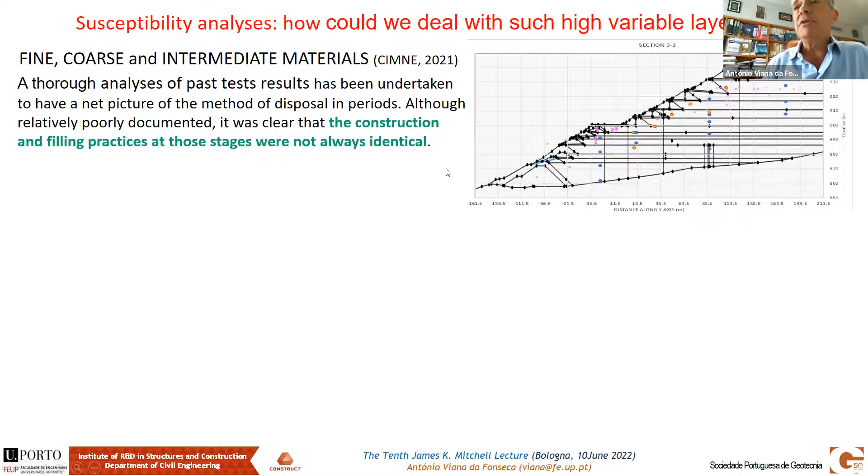This is not my mainstream of the lecture, but I will have to tell you that this is described in the panel report, but also in some conference that Marcos did some time ago, and they are already recorded. You can see here that to get this block-ring clustering of the areas, you cannot do it by small areas, you have to have clusters, and we decided to do these small rectangulars on the mesh.

This is one of the sections, section 3, the one that was coincident with the place where someone was doing an increase of pore pressure. You can see all these percentages of fines were not invented. They were dragged on by the analysis in CPTU tests.

In the end, the attempt was to have a kind of percentage of fines defined by what I will explain immediately after, but in the end we could get this numerical simplification for the model. Again, the panel report is very detailed on that.

So you can see here one CPTU. If you explore, you have to decide. So the model, to model these materials in each and all positions in the ground model recurring to CPTU, we had 38 points, 38 CPTUs reaching almost 1 kilometer and 37,000 useful data points, which were carefully treated.

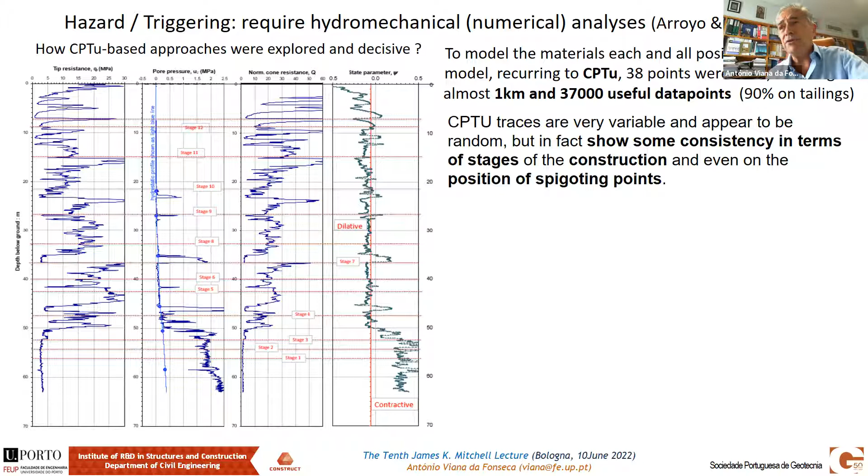So the CPTU traces are variable, but they show some consistency in terms of stages of the construction, or even on the position of the spigoting. And we can see that in fact, if you look at this classification...

The first was trying to subdivide in clusters in order to separate the fines from the coarse, meaning the ones that are very permeable and the ones that are not so permeable. And this can be done with...

Peter Robertson did a lot, and it's amazing the work that he did on this behavior index, soil behavior index. But the proposal that he did on general, usual, non-conventional materials, was 2.6 to divide the more permeable from the less permeable, the effective stress analysis in one and undrained total stress analysis in the others.

But then we had to study that in the silty materials, and we did that already in this liquefaction project in the silty sands in Lisbon, greater area Lisbon, that we studied a lot because of the high susceptibility to earthquake and liquefaction.

And then we realized that in this kind of silty materials, marine, coming from the inflow, it seems that the IC working around 2.85, the one from Peter Robertson and Wride, could be working better dividing these two clusters. Marcos and all the people that worked together sat down with this data that you can see here, trying to evaluate if 2.6 was good, or 2.7, or even 2.85, which in fact was the one that we used in Lisbon.

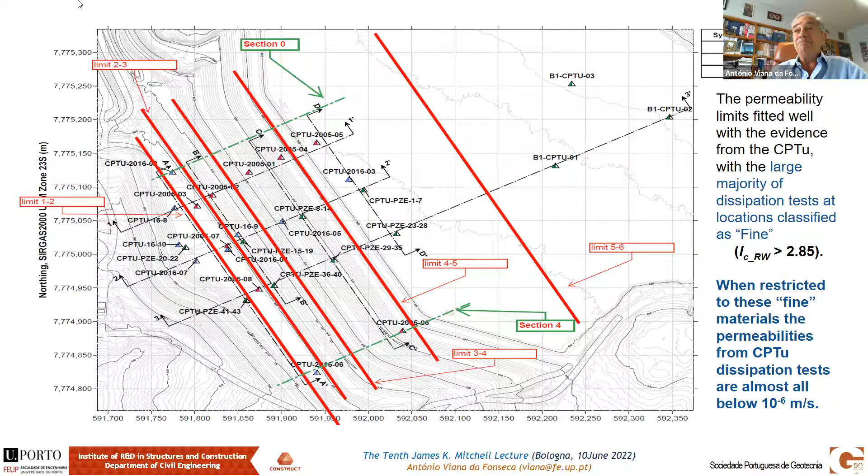And it did match very good. In the end, the 2.85 did well. Well, I'm not seeing anything. I'm just seeing that you are dividing the ones from 2.85.

Yeah, but before, that was the analysis that was made, described again in the panel report, that all this data was analyzed, reinterpreted, making this subdivision for 2.6, 2.7, 2.85.

And you can see here that the blues, the light blues towards the orange, which is here, well, the difference is, okay, this is undrained, this is not, this is drained. Come on, there is a lot still very close, not so different, not so clear. Then let's try 2.7.

This is the BQ, by the way, I forgot to say - delta U divided by effective vertical stress. The BQ is a very detailed, very sensitive parameter to evaluate the permeation of the material.

If you go to 2.7, it gets better - you get this yellow one standing a little farther away than the others. And finally, when we get to 2.85, it's mostly clear. Not perfect, it cannot be, but anyway it's really very reliable.

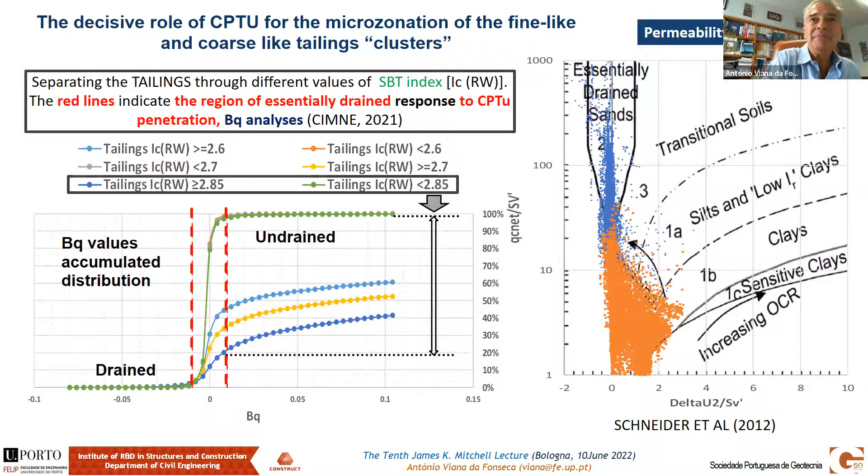So with the confidence we got from this, apart from the other work, we split these two areas from fine to coarse - black to red and brown in the lab. But then the dam was by itself zoned in these clusters, using this analysis of the BQ.

Finally, and complementary, the K values - the ones we could analyze from the dissipation tests that were available - some dissipation tests in this CPT analysis. Unfortunately, they were not explored any time before. We did that, and then we could also work together with BQ.

Not only that - our colleagues from Barcelona, and Monforte, one of the researchers working very well on this subject, developed a method that is limited but still very useful, which is what they call on-the-fly hydraulic conductivity from piezocone. This is available - a very complex, but not so much, and very useful approach.

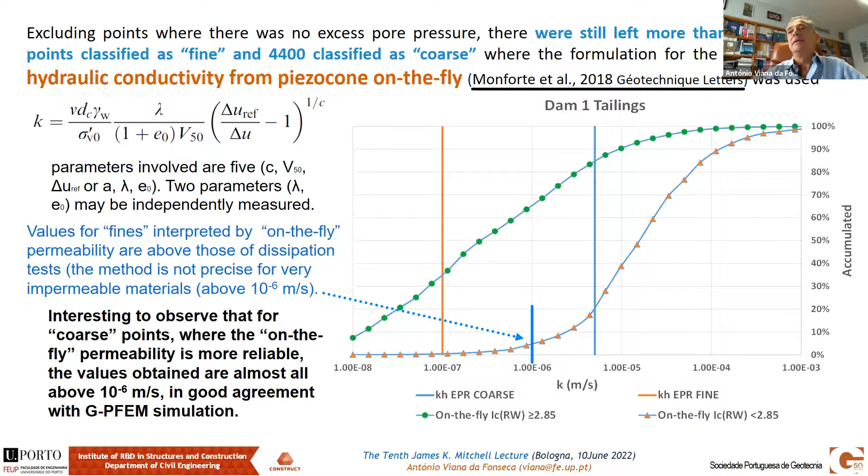So, okay, we have the tools. Then obviously we had a lot of permeability tests in triaxial chambers and cells. We always did the measurement of the K permeability at the end of consolidation of each and all samples.

Also in this set of consolidation steps - increasing confinement stress, effective stress, towards the definition of the VS, any of those steps apart from the VS, etc. - we also did the definition of the K, the permeability or hydraulic conductivity.

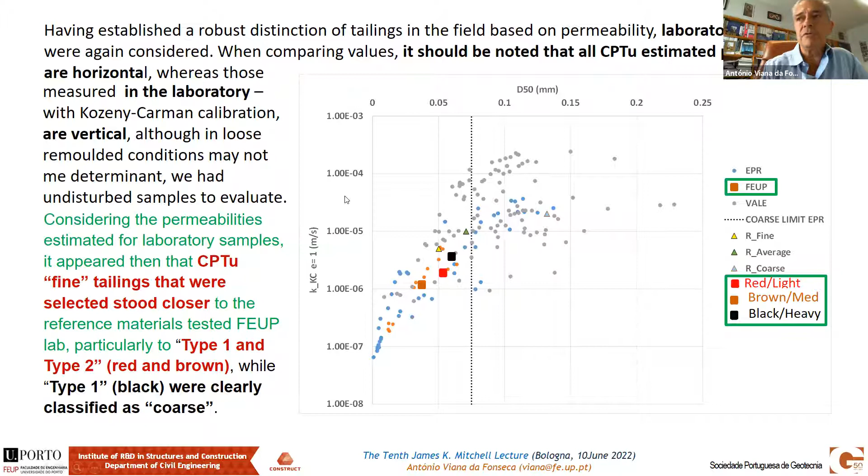So they fit together, which is also very comfortable for our analysis. These CPT tests are fantastic for what I said before.

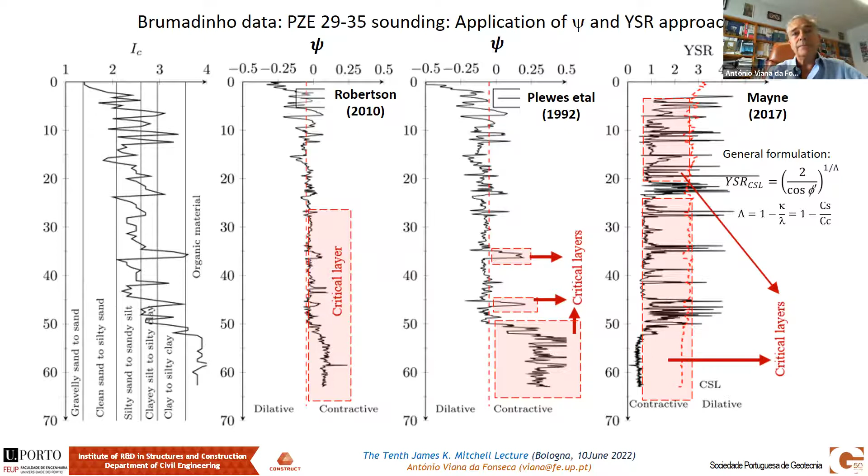Less evident in Robertson, more evident in Plewes, and also in Paul Mayne. If you look at the excess pressures created during all this process, there will be all the conditions to create a cluster of materials that will progressively liquefy. So let's go on. The CPTU is fantastic for this subject.

We did this analysis more thoroughly in collaboration with Mike Jefferies, who sent us the more recent version of their method, and we used that for evaluation of the state parameters. We're using the widget, the software they had, to subdivide drained and undrained conditions. You can see here that, following this analysis, values of Bq around

0.02 towards minus 0.02 are drained conditions, while around 1.5 are undrained conditions. The other ones you decide. And you can see here again that Plewes, considering already the inclination of the critical state line, which is possible, is still much more conservative than the others. There is some recent work from Andy Fourie and David Reid. They try to analyze why this is not so conservative in this widget analysis that I invite you to read.

This comes from a very recent work from Andy Fourie and his colleagues. There are some explanations why the widget can be not so conservative. So with the state parameter analyzers, as I told you, with all these CPTU tests, also again the cumulative frequency of the values of the state parameters on Plewes and on the other widget analysis.

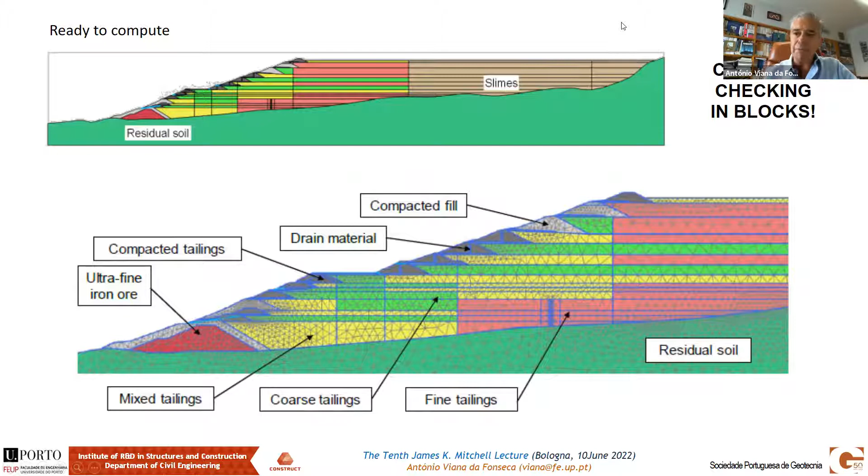Then you can divide the materials again, in terms of higher or lower state parameters, and evaluate the set of clusters, associating them to fines or coarse material, lower and higher state parameters. This is what was implemented in the mesh, and a lot of analyses were run in the different sections, different conditions, different hypotheses. I will not detail that.

This is part of the result. I want to emphasize that, at that specific area of the dam, of the reservoir, there was clearly a system behavior, a system response, which is described here. Ross Boulanger talks about this, which is very important, how the layering comes to be, and how decisive it is

to the drop of the pore pressure and then downstream to the residual stress, while in other systems, if there is permeation, you can have higher stability. This is well described in the recent keynote or theme lecture that Ross Boulanger did with Professor Lai from Japan, where they discuss a lot these kinds of evaluations we have to do, looking at how layers develop and how these layers can be particularly sensitive through their interlayering for the triggering of this phenomenon.

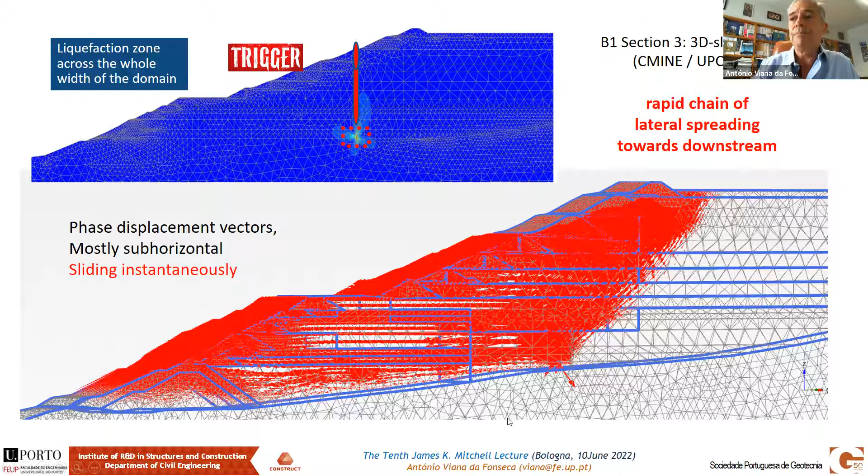The brittleness index is mainstream now. We can mostly predict the behavior of a specific material, whether it can be unstable, by looking at this index, because it's strongly related to the ratios of undrained shear strength and effective stress. The peak value, the maximum, is disliked by some because it represents a hardened, dilatant material that goes over the critical state line. That's true - maybe it's cemented, or a residual soil, or over-consolidated clay. But we're not talking about the same peak. It's a peak inside the stress space bordered by the critical state line - an instability peak behavior.

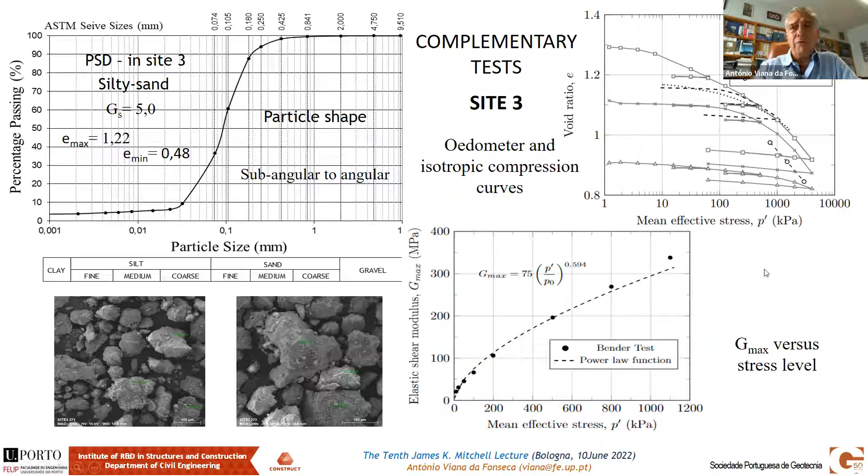This is the data we developed more thoroughly. The black material is the one that really dominated the area that failed, and you can see some of the results here. I won't detail this because it will appear in more detail in these papers.

But what I want to tell you is that we clearly defined that the instability line in this case is mostly independent of K-naught, whether it's 0.5, 0.7, or 1, as I already referred to. The critical state line is mostly unique, but these are the dilated materials, important for us to understand and integrate into the numerical analysis. This is a much cleaner and clearer image of those results.

Then I plotted the ratio between the undrained shear strength at peak, normalized by the effective vertical stress, for K-naught equal to 0.5, 0.7, and 1. There is some influence. By the way, there's a paper published on the Brumadinho data recently at a conference, but it's not so complete.

So we have to be aware of that, but we don't usually work with P prime. No, usually we do sigma prime V naught. Yes, we do, so we have to be aware of that. If we go to a limit equilibrium analysis, you should be aware of that. When you take the sigma prime V0, you have to look at where I'm standing in terms of K naught in order to use that value.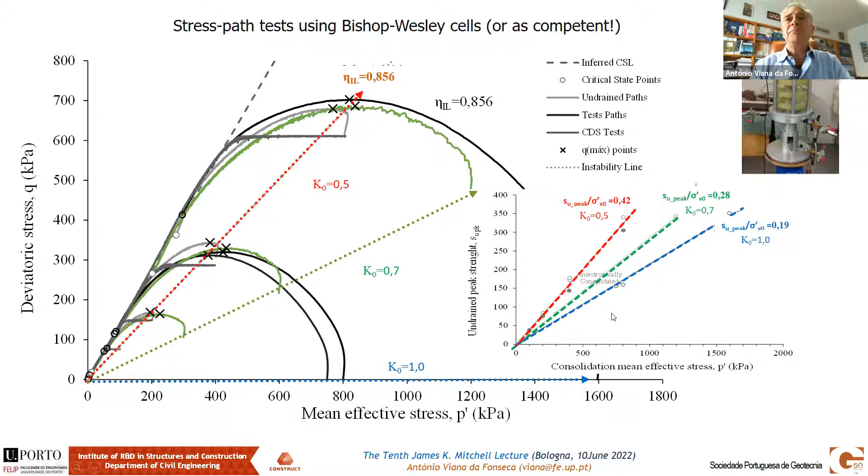And then I decided to, well, Marcos did also something similar in his conferences, but this is more complete here. You can see here the set of data that we analyzed in this plotting. Site 3 is here, but also the others that were already before in the report. Do you remember the black, the red, and the brown? And then the open squares is the new material on site 3.

And you can see here the dependence is obvious. You can see here 0.42 for K naught equal to 0.5, 0.28, 0.19. So 0.19, you have the SU peak, all data is somewhere here. These are the data of that K naught 1.0. If you look at the 0.7, the data is all here. And if you look at the 0.5, which most of the tests were done in this condition, all the data is here. A lot of them are mostly zero in terms of residual because it dropped down and we could not drag the connection with the critical state line in the stress path.

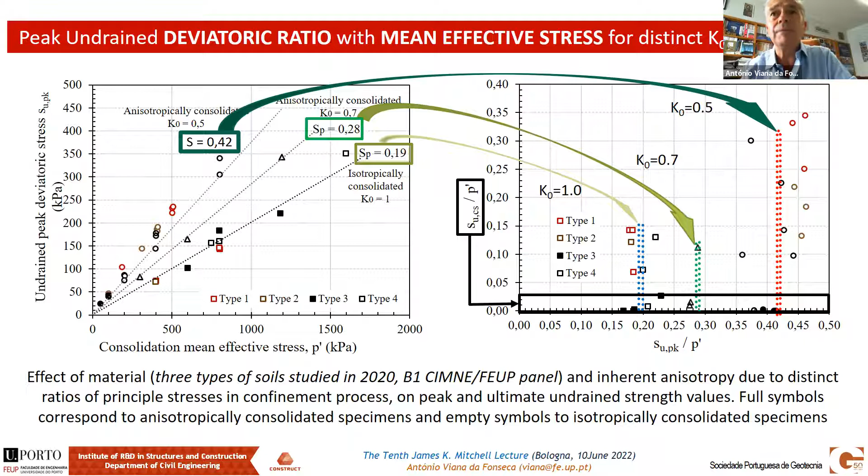But then if you look at the trend, you see like, wow, the blackish one is terrible. It's terrible. So it seems to have a very low condition, very low. Indeed it has. So I try to map here in the first approach, how can we go towards a trend. And look, you can have even less than the values that Professor Lai defended, around 0.06. So eventually, if I don't have any more, I will go for 0.06. And these are very low values.

Finally, do you remember that we talked some time ago on the stress paths and the influence of anisotropic behavior, inherent and induced? When we look at the place where something was done in order to increase the pore pressure, and with that systematic and continuous increase of pore pressure in time, enough time to create an excess pore pressure in like a cluster, when it triggers some kind of liquefaction, then you have a complete evolution of that increase of pore pressure, increasing the lateral stress towards downstream, while it immediately deducts the pressure down.

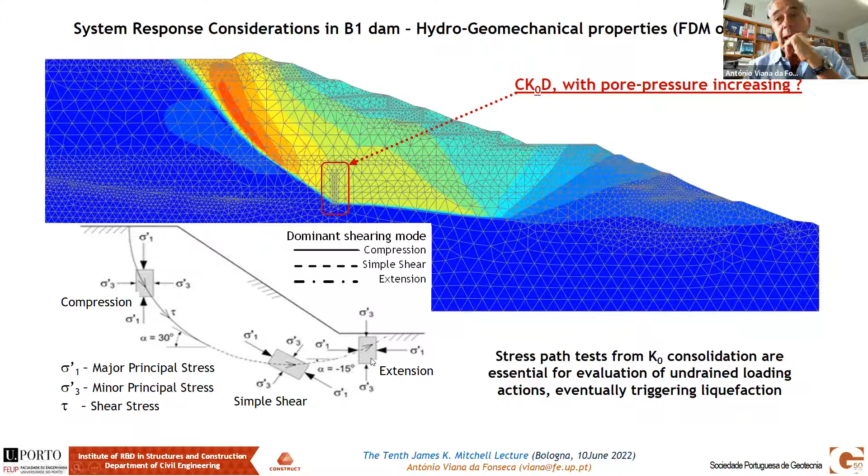So you can see the images of the stress path tests from the K-naught consolidation are essential for evaluation of these actions. And what I want to emphasize here is that here you can have a much higher undrained peak strength than here. And that I was showing you when I was showing this compression test. No, here is only compression stress. If you want to be strict on the positioning on your finite element code, or different code, of your position of your points, you have to put them in the K-naught position that you think and rely on.

And then I will talk about the extension tests. If you look at the extension tests, if they are here, sorry, this is too heavy. I told you that the amount of the increasing pressure is so high that the values of the undrained shear strength is mostly equal to the residual one. It's very low. So look, these are the values of the highest deviator stress when you increase the lateral pressure in the stress path. It's axisymmetric, not plane. Plane will be a little bit higher, the value of the ratio, but it's still very low. Here is 0.06 again, for all these 4 tests that we did.

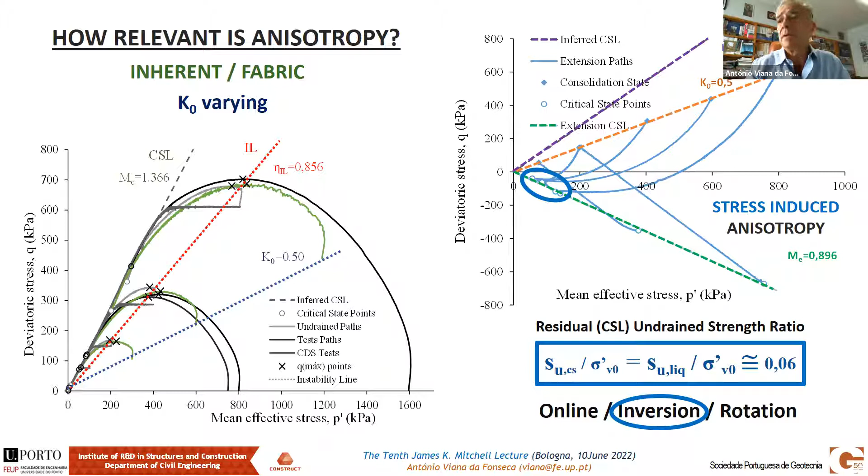So anisotropy, we can have inherent anisotropy, we can have induced anisotropy. By the way, the colleagues from UWA, David Reid and his colleagues, and Andy Fourie is in this team, they tried to analyze how this can be important to look at the K-naught values and the inversion and the rotation of the stress, so the alpha value, when you look at a specific tailing pond. And look what we have here. This is their analysis in finite element code, in this paper, very interesting paper that you should look for. You can have these K-naught values just emulated by numerical analysis, around 0.75 here, while you can have here and somewhere here very low values.

If you look at the value of the state parameter from this side and that side, it seems to be improving, less positive but still positive, meaning instability is still present, but K-naught is much closer to the instability line. Wow, that's the issue. Your stress state at repose is very close to instability. For instance, if you increase the pore pressure, it goes very fast to the instability line. So the instabilization is fast and sudden, and for not so much action you get the problem.

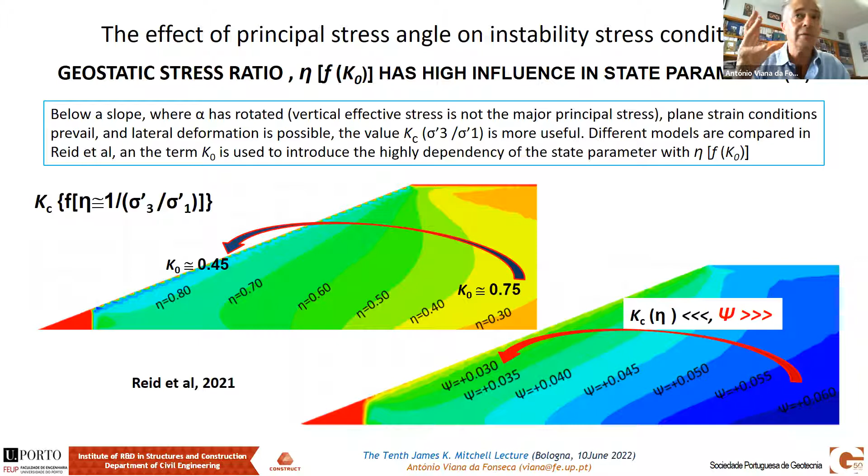Do you need to determine the K-naught values in your structure? Just do it.

How? You can do a pressure meter, a self-boring pressure meter. Quite complicated, we all agree, difficult to perform in the ponds. You can do it in the piles, the big dry stack piles, but it's very expensive and there are so many in the world. But then you can do PMT tests with a small rig, an auger, and then you do the test.

You don't have the K-naught, but you have an idea of the value, which isn't K-naught because you have a pre-bore, then you have to put the pressure meter there. But then you can at least relate the different values from the crest inside the deposit and see how it changes.

Pressure meter—but then the simplest one is the DMT. It's an approach that's well calibrated already, so I'm a big fan of this. If you want an idea of K0, you look towards the KD, which was very well developed and interpreted and correlated by the late Professor Silvano Marchetti.

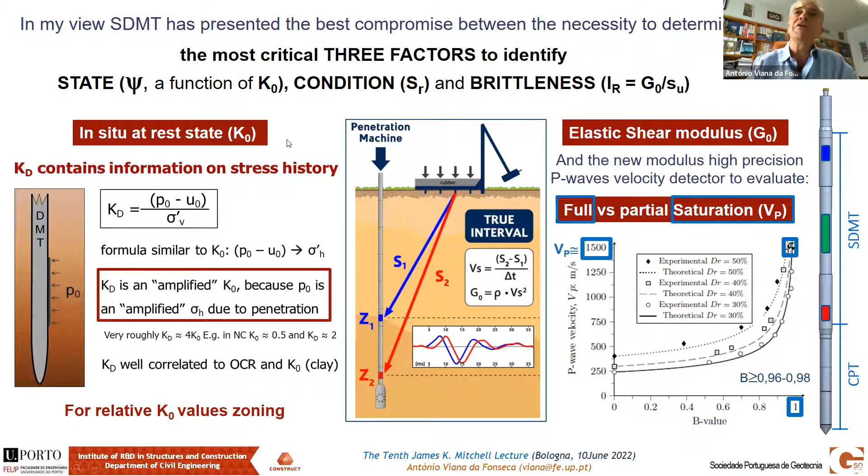Finally, if you use the seismic module, you can have the VS and the VP. There's no justification for not using what's available to do better.

So finally, I'm discussing here some of the numerical simulations we did on some of these tailing dams or tailings materials, which we're doing in Minas Gerais. I want to show you some simulations we did on a specific material, which I won't identify, in tailings—of course very similar to the ones in B1.

We calibrated this in Nor-Sand—we're used to doing that. Traditionally we use the approach from Mike Jefferies and Dawn Shuttle's spreadsheet. We also did some Plaxis element tests using the parameters we calibrated from all the tests I showed you before.

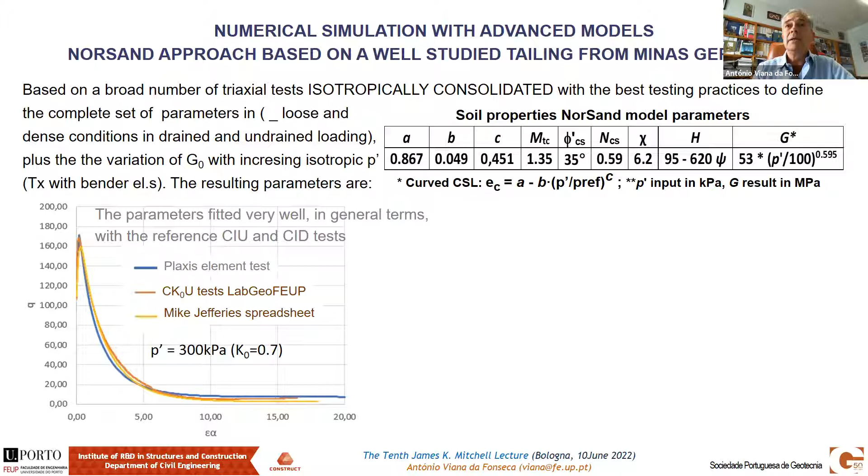Why is that? Because we calibrate this with isotropic tests—usually calibration is done with isotropic tests, very good isotropic tests to get the critical state line, the lambda, or whatever data is necessary to identify these Nor-Sand models. But it doesn't work for different pressures. So should we be aware of that? We have to be aware of that.

This is an MSc thesis that was finished this week and will be available. You can see here that if you look at Plaxis, it's a problem—no, actually it's a very good frame. But we also did this in FLAC, because some people say FLAC is good since it does explicit analysis, etc. We did it also with FLAC, and the problem still stands.

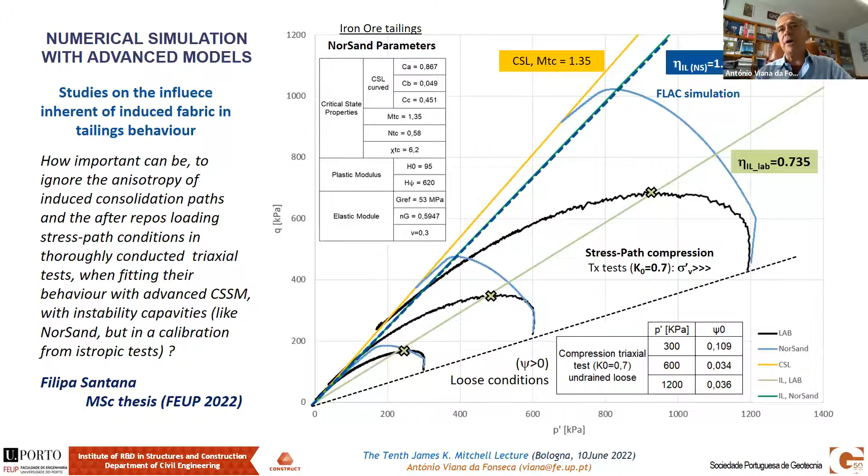So we have a different behavior when we simulate and towards the test. We have to work very much on this. The models will have to incorporate anisotropy. And in this case, it's the K0 that is demanding for a kind of isotropic versus anisotropic behavior, let's say. It almost becomes fabric induced, so it becomes inherent, an intrinsic value of the condition of the stress at repose.

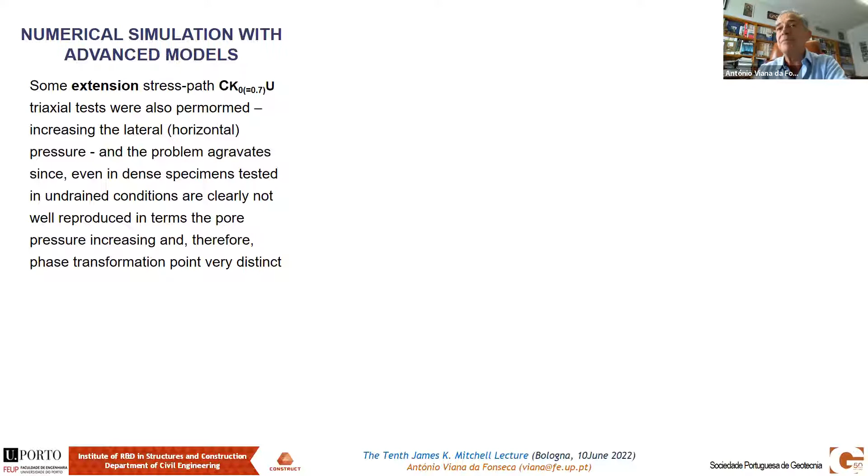While if you look at the extension stress paths, I will not show some of the most precious data, which is in loose sands, loose tailings, but at least I'm showing you here that if you look at the stress path in extension in dense soils, these dense materials are not going to be instabilized, but they will contract because we are increasing the lateral pressure. In undrained conditions, in the lab test, you have all this increase in pore pressure. So this would be the drained condition. But in the lab, you have all this increase in pore pressure. While in NorSand, you have this and this and this. So really different. So the anisotropy is not working well here.

And you say, well, that's a problem of the critical state line. It is not. Because if we do the simulation of the drained test, everything stands well in phase with the critical state line with the same angle of shearing resistance. So we have a problem. So we have to solve that.

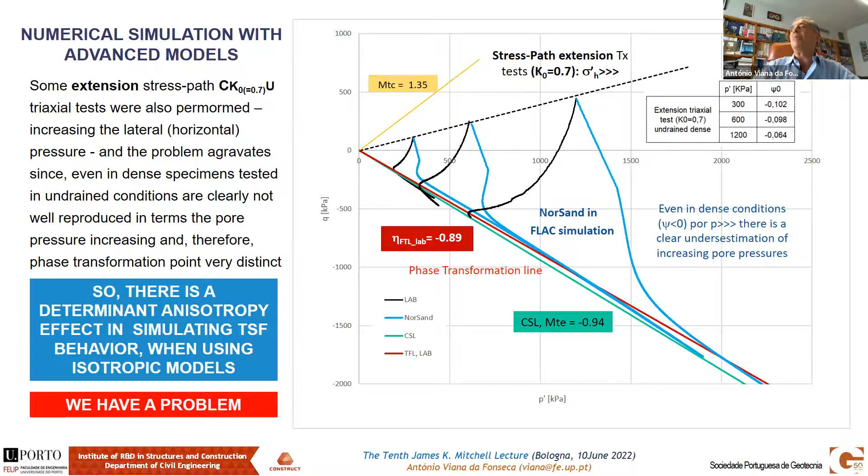So the future in terms of modeling will definitely be to invest in the anisotropic approach of the modeling of these materials. And this is just an image of the K naught equal to 0.7 that we use in modeling.

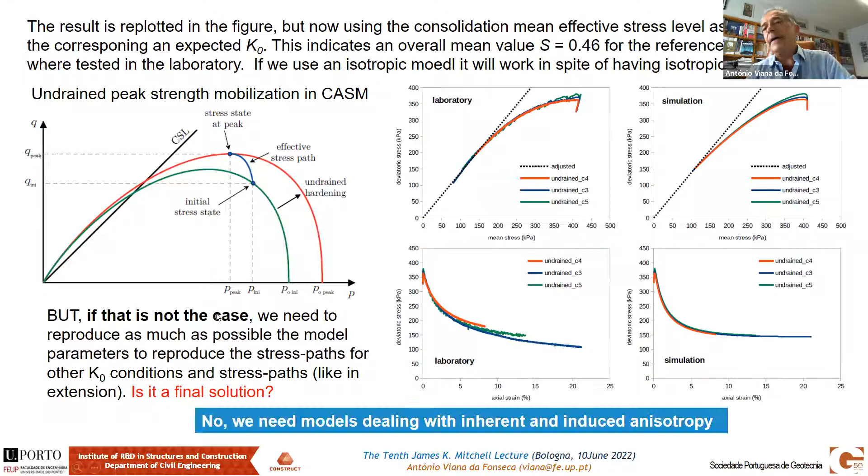So we have some conclusions here. I have just in brackets that people from UPC are now working with CPTU, and in CPT 22 there is an excellent resume of these latest proposals. This one was in Computers and Geotechnics, the journal, coming from Luis Monforte and all these colleagues that I told you lead this group in Barcelona.

And they have a very neat interpretation of the possibility of working with pore pressure or the cone base QC, QT of the CPTU, and from the analysis of one versus the other, they can go towards the definition of a value that is close to the peak and a value that is close to the residual undrained shear strength. Look at this, it's improving. It's a very interesting analysis, and it's really very much dependent again on the brittleness index, which is in fact the key issue for us to know if we can expect higher, less high, or even null fragility.

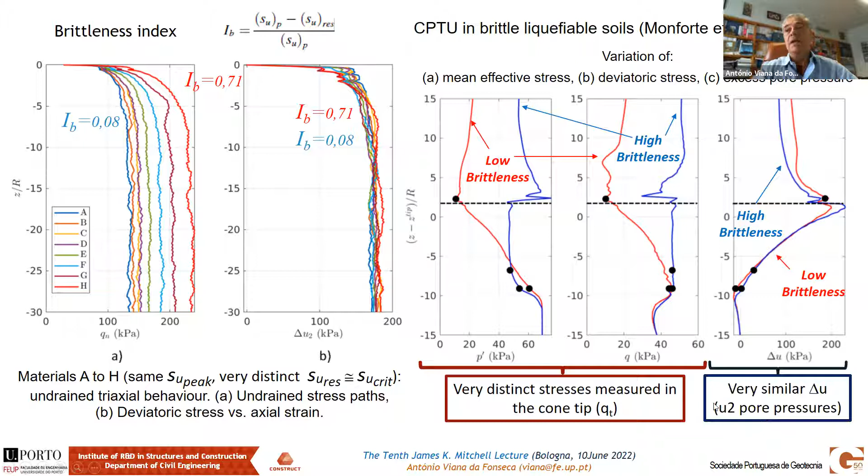So, considerations. Well, you can read this. I'm sorry, it's too long already, but these are the main issues. We have to be aware that these are tricky materials. We have problems of brittleness. We have problems using limit state equilibrium analysis. If we don't account for this evolution from peak to residual, we have the possibility to go towards more complex but available stress-strain coupled analysis in Plaxis, Flac, or whatever. So let's keep on working because we have a lot to do.

Some acknowledgements, please do stand for a moment. Very much recognized to Vale, who allowed us to do all this. MPF tried to go through different approaches to get the reasons why this dam collapsed with so many damages. Special emphasis to Professor Marcos Arroyo and Professor António Gens, who I have the pleasure to be a very good friend of. They did incredible work. People from Sebastião Oliveira from MPF and Leonardo Mesquita and all these people who work together with me, fantastic guys. And of course, Professor Antonio Mendoza, who was very, very dedicated to the second and third campaigns. I could not go there because I was in confinement in Portugal, I could not go back to Brazil. And finally my colleagues, António Fonseca, Cristiana Fonseca, a lot of Fonsecas, Daniela Coelho, Diana Cordeiro, Davide Besançon, Fausto Molina, a PhD student now at NGI, Daniela, technical director of the laboratory that I directed, and finally Antonio was a researcher here, and Cristiana is assistant professor, invited assistant professor here.